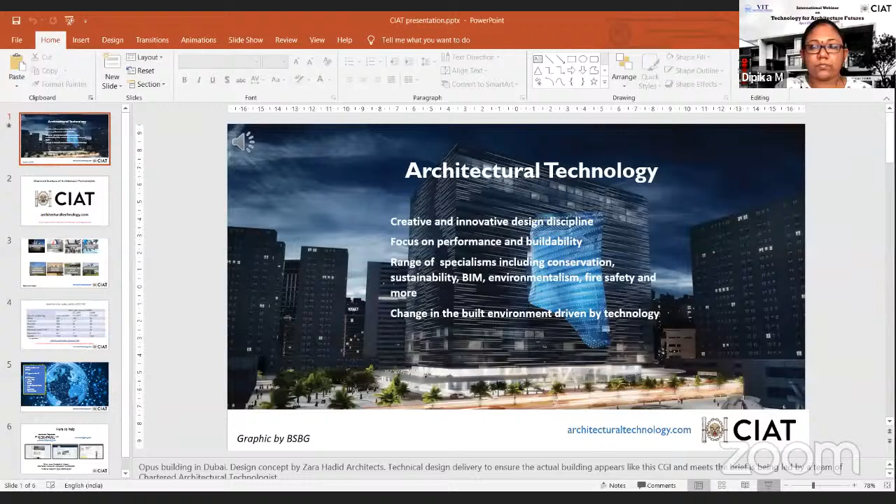Which integrates architecture, science, technology, and engineering, and focuses on performance and buildability in design. Architectural technology encompasses a range of different specialisms, including conservation, sustainability, BIM, environmentalism, fire safety, and many more. Technology is leading the change in the built environment sector, and the Chartered Architectural Technologist is the professional with the skills necessary to drive this change.

The Chartered Institute of Architectural Technologists, or CIAT, is the qualifying body for the professional qualification and protected title of Chartered Architectural Technologist. It is a not-for-profit organisation which sets and maintains the standards of education, practice, and professionalism in architectural technology by awarding professional qualifications, applying its code of conduct, ensuring members undertake continuing professional development, and accrediting qualifications in higher education.

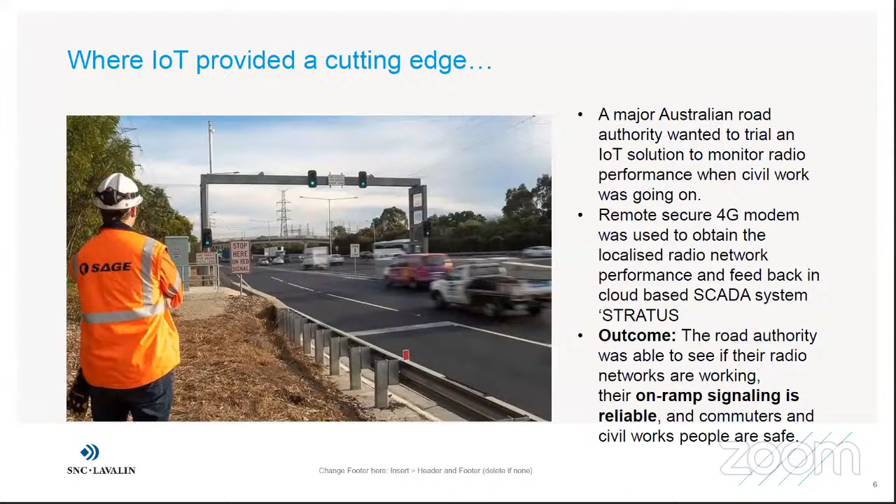to happen in a proactive manner, whereby by using the data analytics they would be able to not just look at what's going on in real time, but from the patterns that emerge through machine learning, by using algorithms, they were also looking at predictive analytics to potentially look at threats of asset failures that could happen in future. Now, this started off in October 2020, and it will be some time before they are able to capture enough data that will inform their decisions.

However, the early pilots suggest that they will be able to save a very significant amount of money through this process in terms of reducing the asset failures and breakdowns. And they're estimating anywhere in the range of 30 to 34 billion over a 5 to 6 year time frame across all of their assets. So this is very significant.

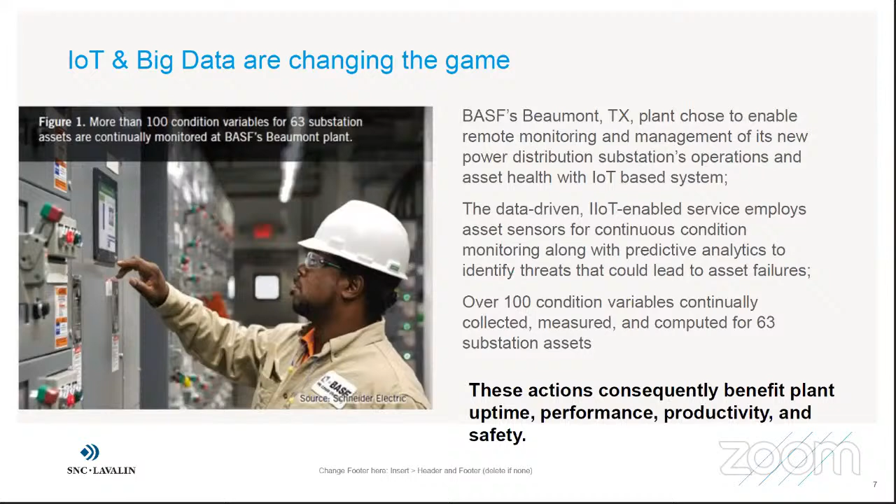And so these are not just concepts which we are talking about in a wishful thinking way, but these are very real, and these are very much being used by some companies that are early adopters of new technologies. So essentially this helps to improve plant uptime and address the issue of productivity in the sector, which is really what we're talking about. And last but not least, also ensure the safety of everyone involved. So if you can move to the next slide.

I would like to also talk about one area where Atkins is playing a key role. So as a leader in the engineering and construction industry, Atkins is really at the forefront of standardizing design components. So we are looking at finding ways in which we will increase reuse. We will reduce repeat work or rework. We will try to standardize the design components, be it in terms of the components catering to a highway construction or railway tracks.

So on a range of such assets, what we're doing is looking at the design components and trying to understand what elements need to be put in place in terms of adhering to the standards, making sure that they comply with ISO 19650, ensuring that the components have the right geometric information, the right level of information required from a manufacturer's perspective. All the metadata is embedded such that these components can be reused, and these are continuously maintained by a team of people.

So we don't need to redo the entire design the next time we design a similar highway or a similar railway track, but at least 30 to 40%, if not more, of the design work can be simply plug and play, because you're going to reuse the existing components and then you can add the bespoke elements. So standardization and reusability are again going to be quite significant going forward, as I see it, because these will play a huge role in certain sectors, particularly modular housing, for example, or schools, where repeatable designs are going to be the order of the day.

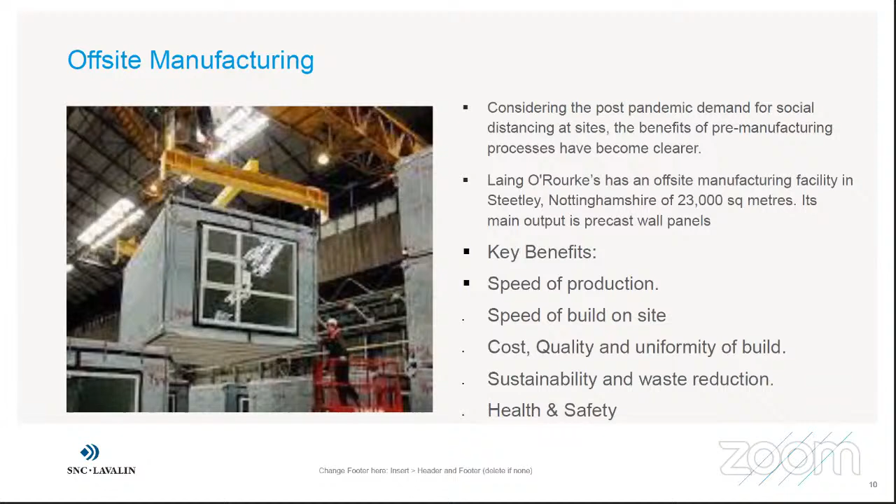And clearly, again, there is a thread running through. So I talked about repeatable design, standard design components. I talked about offsite manufacturing, and now 3D printing. If you see all of these, the running thread is really about technology and data. And so with 3D printing as well, innovation is happening where they're using this method to extrude layers of polyurethane foam and then bring in the third layer of concrete as insulation. And they are really developing these houses.

In India as well, I was quite pleasantly surprised to see a couple of days back that there's an innovation that has come up here through IIT Madras, where 3D printed housing is now becoming a reality. So it is not theory anymore. It's not futuristic in terms of concepts, but it's really happening now, and it's proven in some of the early examples that it reduces your cost by at least 20%, if not more, compared to traditional techniques.

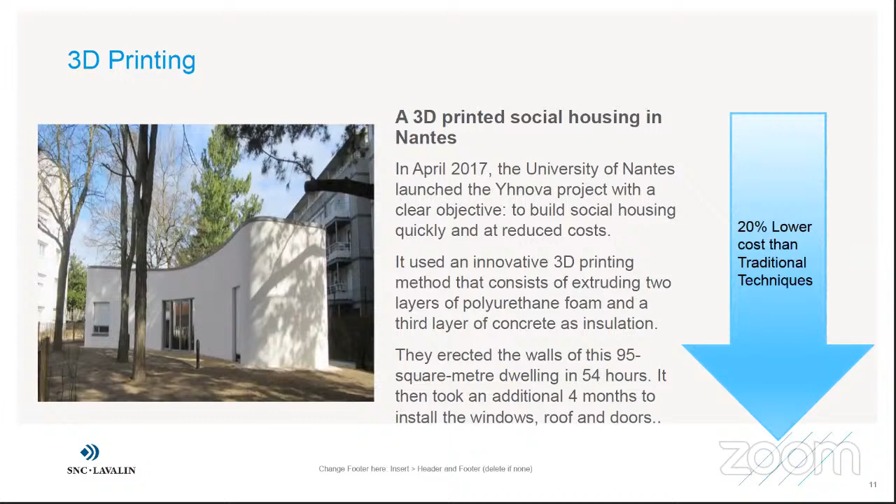So these are some of the technologies which we have seen in various areas, and SNC-Lavalin Atkins is very much intimately involved in some of these propositions. So that brings me perhaps to the last slide.

So in conclusion, I would say that the future focus with all the technology trends that we're talking about in the architectural space will be pivoted on sustainability. And as I mentioned earlier, reduction in the cycle time. We are increasingly going to see a focus shift towards safety and well-being of people as well. And as I mentioned, human-centered design is a key ask we are noticing, particularly from UK and US, with a large emphasis on citizen and user experience.

Of course, Europe has been one of the earliest in this space, where we did some work for the government of Norway to develop sort of a mini digital twin where human-centered design was involved. So there is a lot of disruption that is happening in this space, and it is quite real. Digitalization will certainly lead to some level of disintermediation and drive changes in asset building and O&M, because what I start to see is that digital marketplace and platforms will have a larger role to play.

I mean, even today we know that, for example, NBS is playing a phenomenal role within the building space, particularly in the UK, where they're standardizing templates, they're curating contents, and actually designers can lift and shift and pick and choose some of these content and straight away plug and play in their design. So increasingly we will start to see a lot of disintermediation in this space.

Plus, digital marketplace could bring multiple forces together by way of connecting the consultants with perhaps contractors in the not too distant future. And procurement models are bound to change with Project 13 kicking off. I think that we will start to see collaboration being the order of the day. We will see that the labor-intensive nature of the construction sector could see a paradigm shift with some of the play of technology. Again, all of these are very real, and we got to be prepared for that change when it comes in the next few years.

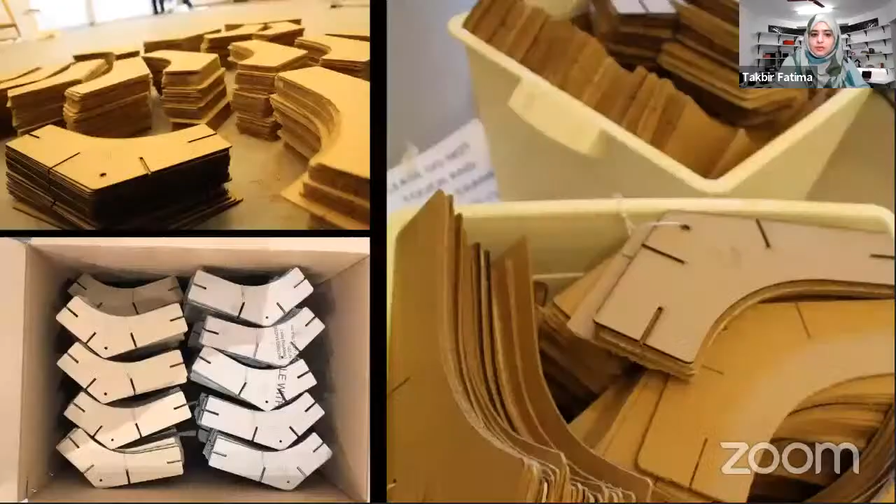And then we sort of tried to predict one of the options that could come up out of it. There are multiple ways of putting it together. So computationally, we were able to predict that. And then we digitally fabricated the pieces in cardboard, and we just gave it to the public and told them to grab some pieces and start building.

So this kind of promotes the idea of collaborative design, where people from all different ages and backgrounds come together. It's a very self-explanatory process, very inclusive and collaborative process, and there's no right or wrong way of doing it. So over a period of 10 days, they were able to build an installation incrementally. Different people came and added a few parts of it, and over a period of 10 days, this became a sort of shared authorship and shared ownership public art installation.

So every few years, we try to revisit some of our previous designs, and we try to see what we could have done further to take it to the next level. So this is a system that we started to work on. Previously with the interlocking system, it was kind of random. So we decided that it needs to be based on a set of rules, and then let's see what happens.

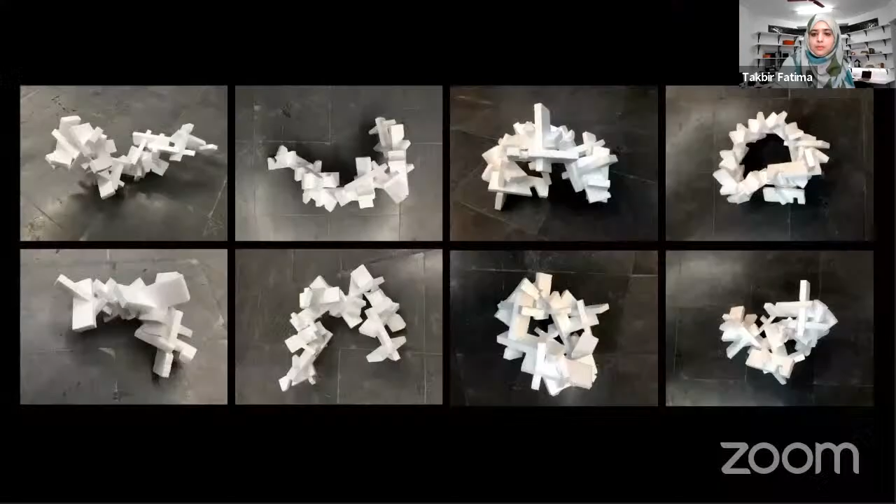So just by changing the rules and the parameters, we're able to get a whole range of different outcomes using the same, this is just one unit, which is being repeated. So it's a repetitive system, which has discrete units, which are coming together in a sort of dry construction system. And then you get a whole catalog of different units. So it's a prototypical system that we are coming up with.

So similarly, last month, before the situation with the pandemic was as bad as it is today, we went to Kerala, and we did this workshop at Kerala State Institute of Design for students from different design backgrounds. And you can see that they came up with their own basic unit, which is laser cut, and it has all of these grooves in it, and then you can assemble it, disassemble and then reassemble it to get a whole range of different outcomes.

So it's a prototypical system with discrete units, and you can come up with different kinds of morphologies just by changing the parameters, and you get different outputs. And then they also translated that into computation and projected it to get higher resolutions and larger aggregations. And the last part of the workshop was to have a larger scale aggregation, larger scale units. So it becomes almost like urban furniture of sorts.

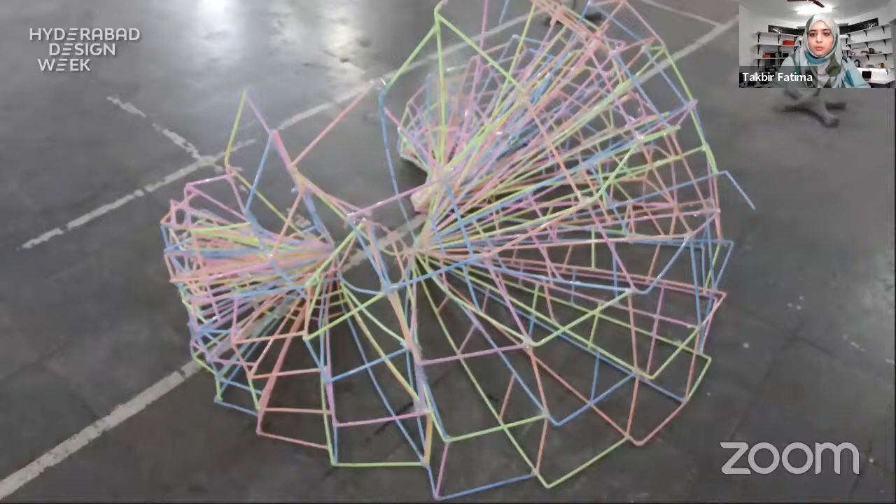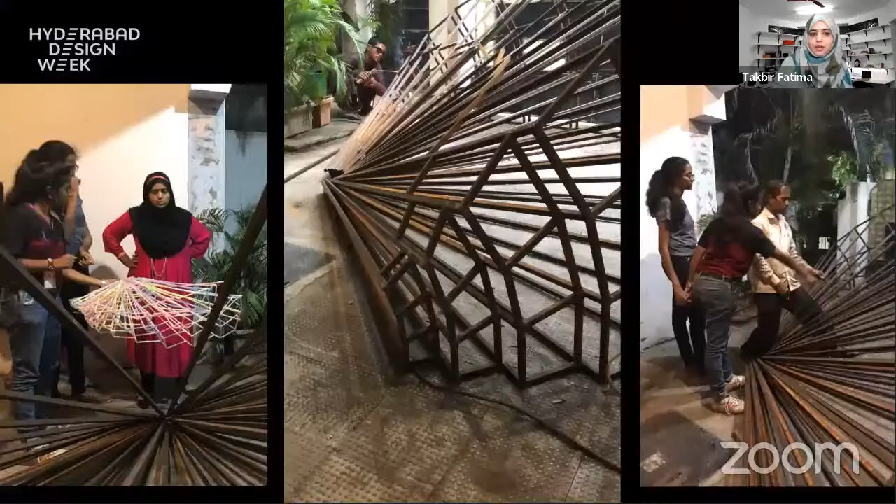So this is one, and this is another example. And we are also exploring remote build processes with our next workshops. This is another workshop that we had done for Hyderabad Design Week, where the students did algorithmic designs, and then we selected one of them and translated it into full scale, large scale and real material. So this is on permanent display opposite the Telangana State Assembly in Hyderabad.

At the same time, we were exploring this concept called the digital vernacular, where we have this dichotomy of computational design as well as local material and craftsmanship. So we designed a series of installations computationally, and then this was the local material cane. So we used local craftspersons and furniture makers to realize these.

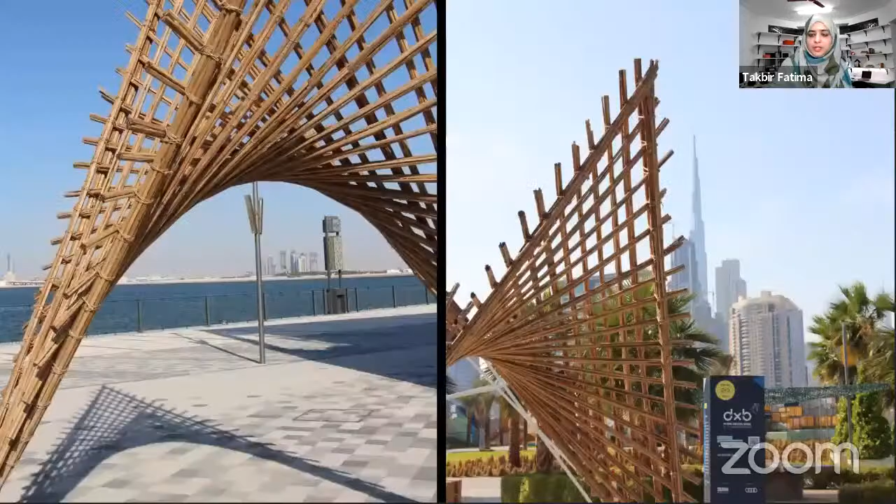Previously, for Dubai Design Week, we had done the same hyperbolic paraboloid structure in Arish, which is the local material there, the date palm frond. This is located in Dubai Design District.

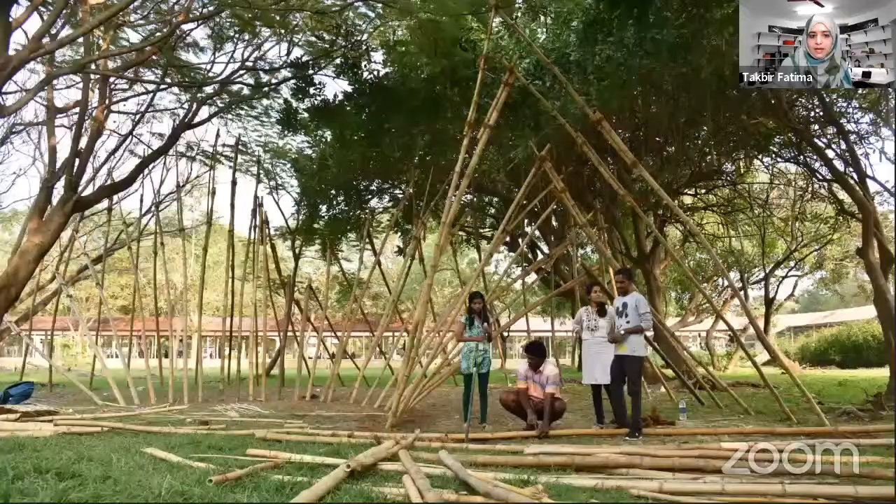And even prior to that, this concept actually was born at VIT Vellore, where we used bamboo as local material, and we used the help of bamboo craftsmen to learn from them. And then the students came up with a whole series of about 8 different parametric pavilions.

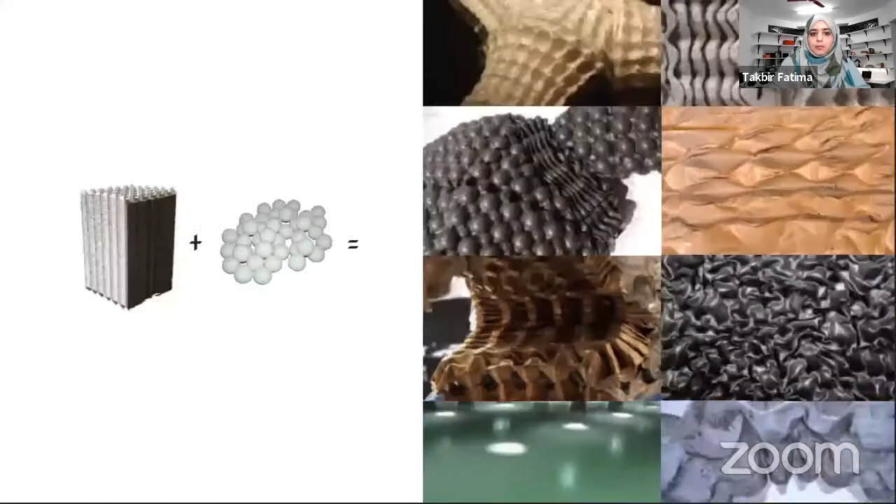So we call this process programming matter, and this phrase was coined during my time at the DRL, when we did this research during my thesis, where we used egg crates as a building material. So we proposed egg crates as a new technology in building, and instead of eggs, those aren't eggs, but ping pong balls. So when we add rigid elements to the cavities within the egg crate, it has a very peculiar geometry to it, and it tends to take different morphologies based on the programming of the matter that we're doing.

So the way that we manipulate or code the way the units are placed together would give us different kinds of results. So they almost become like control points. And the way that we bring the system together, it's a low-tech, high-tech system, which we call a deflatable architecture, because we are actually using vacuum and deflating the system.

And once you remove air from the system, these independent discrete units come together and they become monolithic, and also they're really rigid, and they take on different geometric forms and curvatures based on the coding that is embedded in them. And once you release the air again, you'll have a recyclable kind of system because you can redo it.

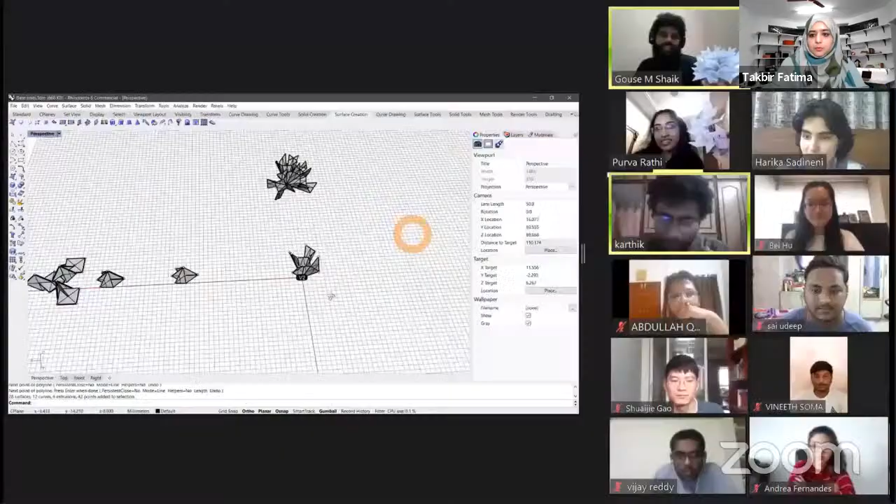So we decided paper was the most versatile material that could be used for online workshops, the Fractals workshop. And you can see the analog models being translated to digital models, and then again to virtual reality. So here, this is a culmination of the student work from a workshop we did with the Boston Architectural College. That is Peter Atwood, the director of digital media, who co-directed the workshop with me.

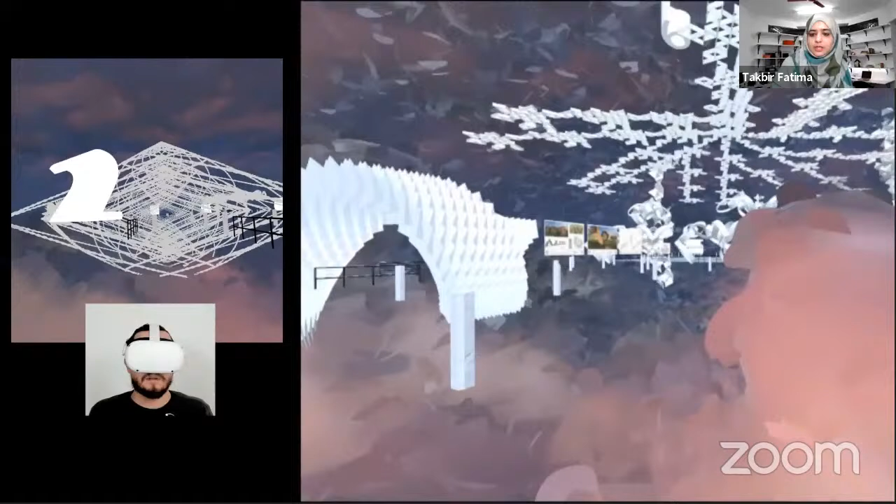So what's really great in virtual reality is that it's completely free of real world constraints, like physics and gravity and scale. You can pass through the models, you can fly, and you can see things from different angles and different vantage points. And so this becomes almost like a sort of virtual urbanism.

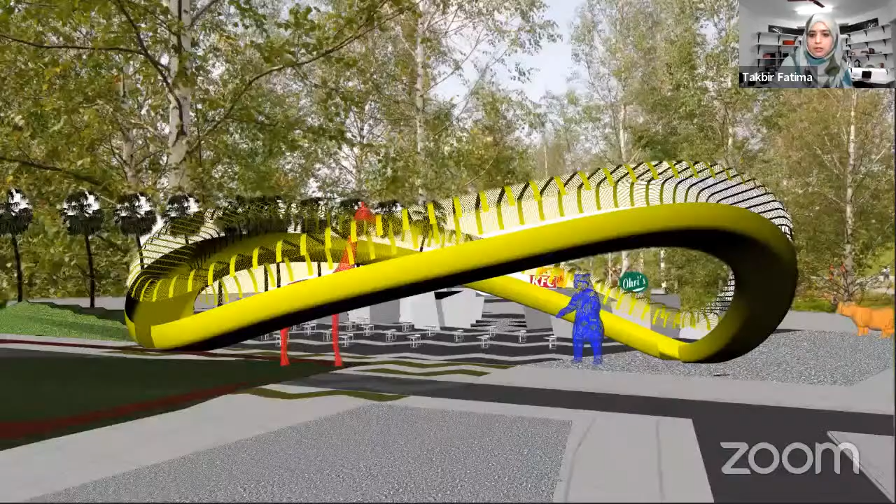So coming to our practice, we have a whole range of different projects from different disciplines to different scales, from digitally fabricated wearable tech to a smart, accessible park for the city of Warangal in Telangana. So Le Corbusier said that a house is a machine for living in, but now I think that's become antiquated, and I think a building is an extension of the body.

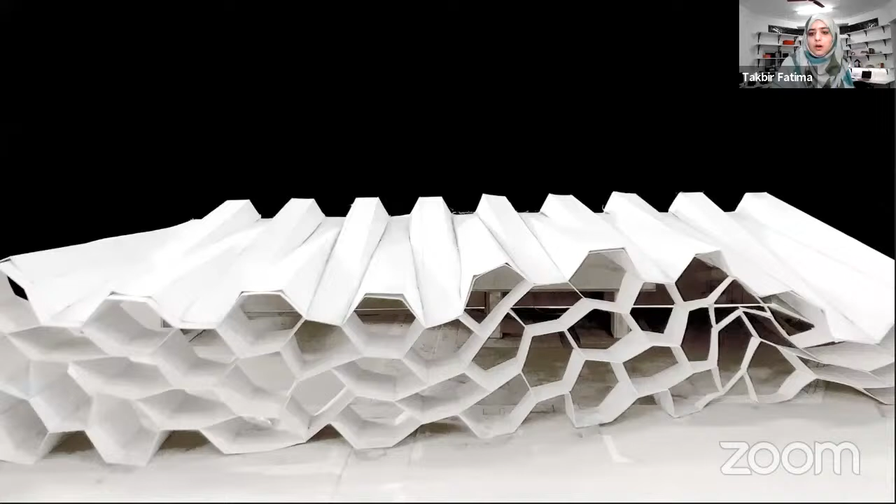So this is a project where we were asked to design a smart office for an IT and IoT company, embedding their IoT products into the building itself. So this is an existing commercial building, on top of which we had to design a penthouse, and then the beehive kind of structure is the facade, and the undulating roof become an envelope for the building.

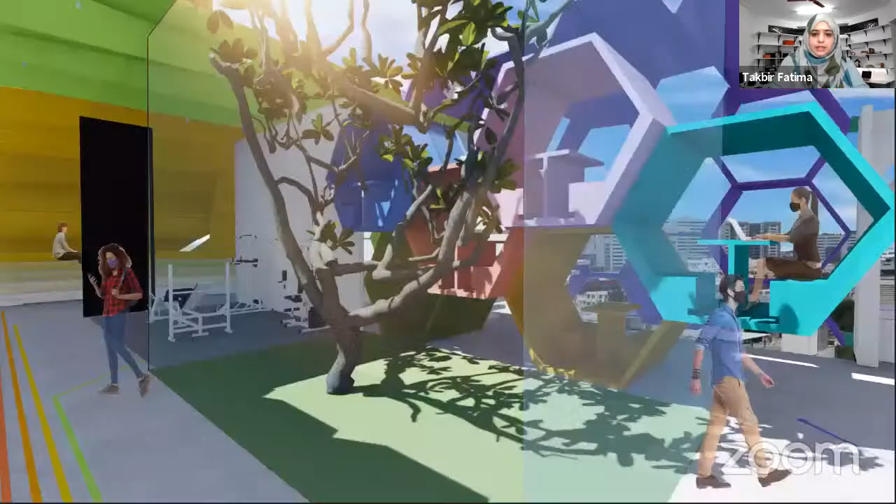This is the evolution of the undulating roof structure, which is almost like an extrusion of the beehive surface. And we used some tools for analyzing the daylighting and the heat gain. In a lot of designs, we like to incorporate traditional Indian architectural elements within contemporary spaces as well.

So we have the courtyard, which even though it's on the 6th floor, gives you this ground floor feel and makes it a green space. And then we have the jali, which is the screen, the hexagonal beehive structure. And the screen is parametric in that it varies in depth in different places.

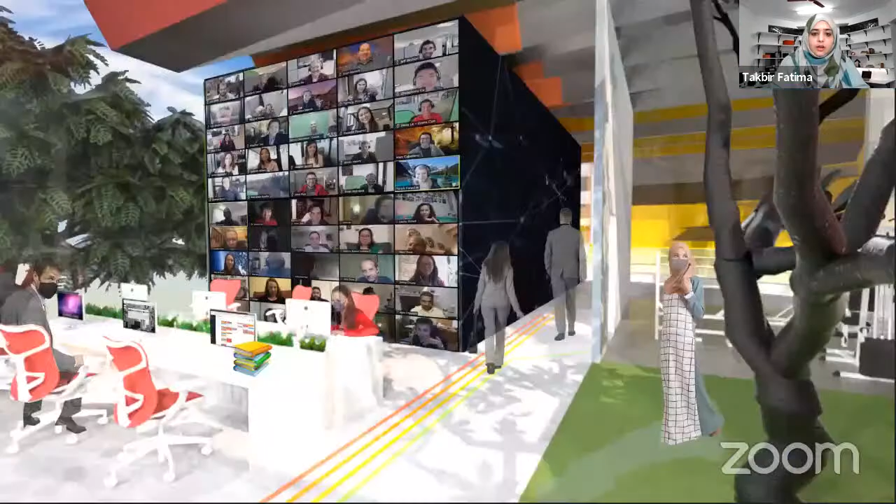So here you have some parts which are deeper, and they become these isolation pods where people can sit separately and work, and then there are spaces where people can work together as well. This cube that you see is a water tank that was existing on site, which couldn't be removed.

So we converted that into a 3D sort of wall, a smart wall, which could have company-wide meetings, but also the IoT products that were embedded were able to gather data from the environment around this building and then project that, not just project it onto the screen, but also the building becomes like an organism that responds to the environment and the data that is being fed to it.

So in terms of the lighting, as well as the temperature, and then the tinting of the windows, all of these things become responsive. And that's how the building situates itself on top of the existing building. And what's really great is that you can see the inside of it, which is really rare to see the inside of the top floor of any building, but the metro passes right next to it. So you would be able to see the inside of it. The construction has not started yet.

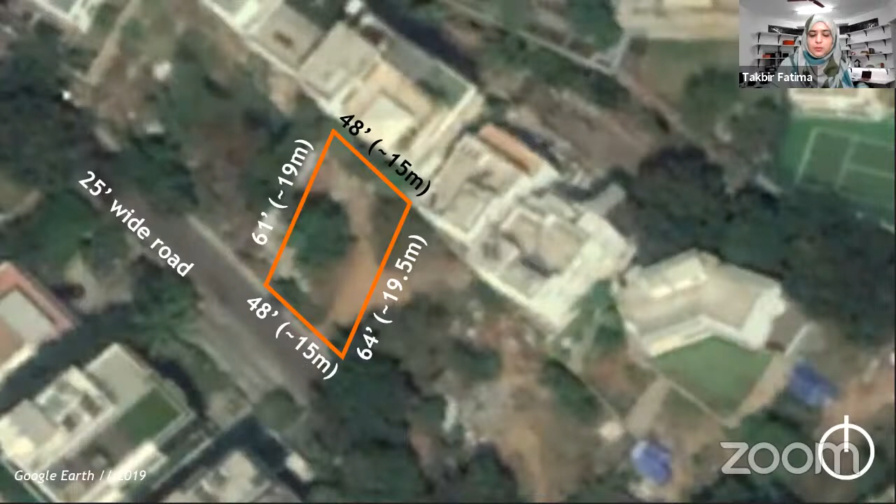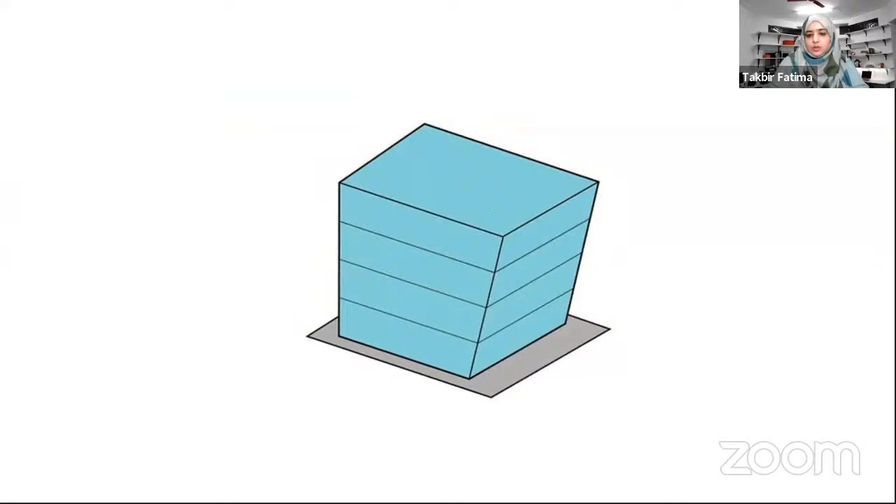And finally, this project is a residence in a very oddly shaped plot in Jubilee Hills in Hyderabad. So you can see that the constraint that we faced here is that we had really heavy programmatic and spatial requirements from the client, but the space was not sufficient, and we weren't able to do orthogonal spaces. And so these are some of the design explorations we did for spatial distribution. And this is how the building evolved, in which we stretched the building from the top and then started to slice it to create an orthogonal stepped kind of structure.

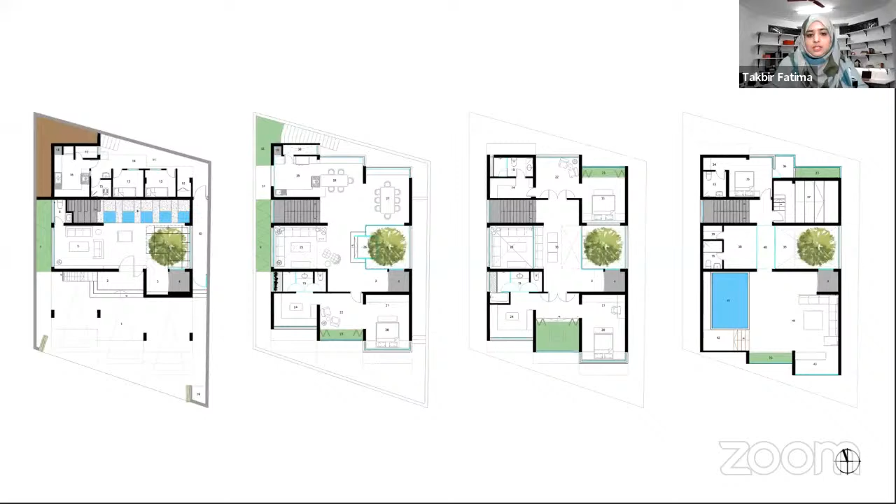So you can see that every level is like a series of boxes which are stacked one on top of the other, and there's an overhang of 3 feet at every level. And you can see that the ground floor has the smallest floor plate, and then it grows as it goes up. And what's great is that it sits within the bylaws and the regulations, because on the ground floor, you're supposed to have setbacks, and then on the upper levels, you can have a cantilever of about 10 feet. So we're able to get a total of 9 feet.

So where technology comes in is that the facade design is a computationally designed louver system of rotatable interconnected louvers, which are parametric in the sense that you can rotate them at different angles to create different percentages of openings, and these openings depend on the program on the inside. So it's an openable and closable kind of system. So it's a dynamic facade which can be connected to the home automation system and also be controlled by a smart device. So depending on the amount of light and privacy that's required, you would be able to manipulate and control the facade.

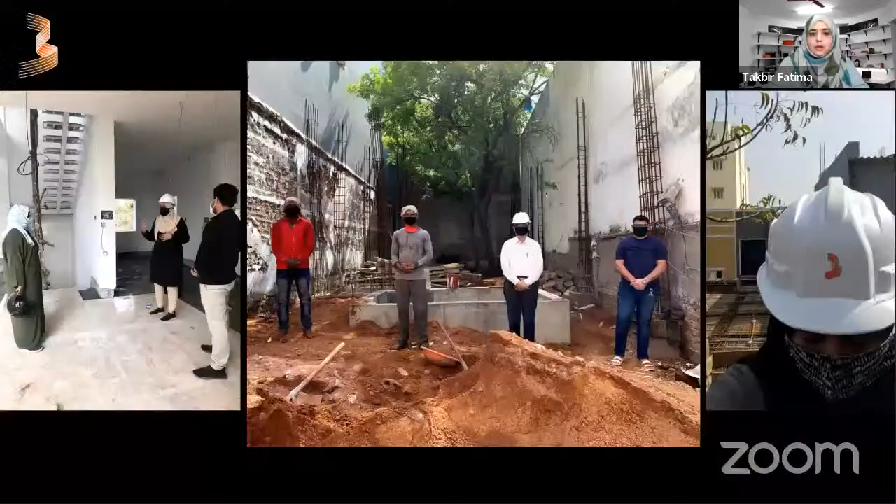So as I said earlier, it all begins from education. So in parallel, we started this initiative called Studio to Site, where we take students and young professionals to our live sites. It's a long-term program where we take them to our sites every couple of weeks, and they are able to learn hands-on from the site itself, and they're able to learn through the construction process as well as learn about project management. So some of these classes were taken online.

We don't just work locally, but by the use of technology, we're able to work internationally as well. So during our lockdown, London didn't have a lockdown at that time. So we were able to design a restaurant in London while we were sitting in Hyderabad. So you can see our remote site visits that are happening on the left side. We have done a lot of remote site visits over the years.

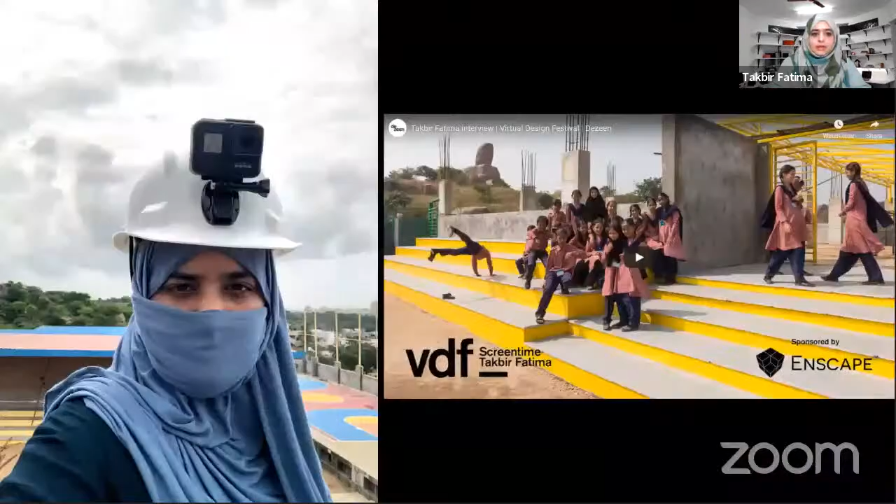The school has kind of over the years become quite popular, and it was visited by groups of students from all over India almost every month. And then because of the lockdown, we couldn't have any visitors. So instead, I did a virtual walkthrough or a remote walkthrough of the school for the Virtual Design Festival, which you'll be able to see on YouTube if you just look it up.

And also, I think it's really interesting to note that the school was included in the Rethink Design Guide as a case study for architecture for a post-pandemic world, published by RIBA Publishing. And finally, we are honored to have been longlisted for the Dezeen Awards as an emerging architecture studio of the year 2020. We didn't win it, but I think being longlisted is quite an achievement for us. Thank you.

Thank you for that presentation. It was pretty fascinating to see how forms come to be by altering algorithms in a certain way and how they get translated into digital platforms and all of the building science elements coming into these forms. It was a wonderful presentation.

Next, we have architect Joe Healey. Joe is a chartered member of CIAT and a senior architectural technologist with 16 years post-graduation experience in the UK, Middle East, and Australia. Joe has worked on a number of exciting and important projects over the years, with a particular interest in historical preservation and sports stadium design. Currently working in the architectural specifications field with a commitment to staff mentoring, which is documented in a book that is about to be released. I invite architect Joe to begin his presentation.

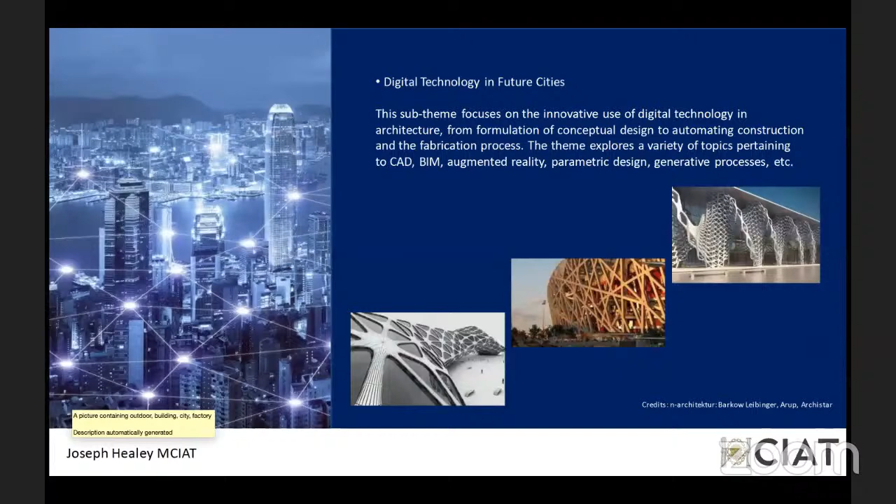So like I said, away slightly from the actual pure design of buildings, it's the sort of involvement of technology in our day-to-day lives and then integrated into our buildings that I've been starting to wonder, particularly over the last few years, how much do we need these interventions? As I'm about to describe, they can sometimes be positive and negative.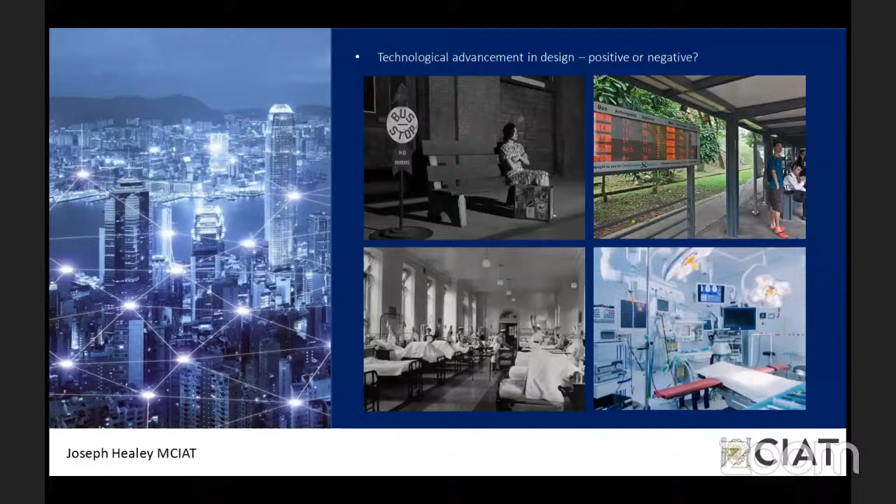But to me, that brings into question, and it's interesting to put this to everyone on the call today, well, on the right-hand side picture there for the hospital, you've got a number of computer screens and all sorts of analysis going on, but would you prefer to have a computer looking after you whilst you're ill, or a person? And that's where I think the technology is really taking over to a point where we need to balance. And coming back to my original point about what is the need for the technology that we're now inviting into our cities and designing.

Now, to some extent, if you have more of an immersive view of that cycling route on a screen, to what point do you say, well, I don't need to go to the Alps in Europe or amazing mountainous regions to cycle anymore. I could actually cycle in my own house, have a big screen in front of me and get at least part of that experience whilst looking through a screen.

So quite hypothetical. And I think you'd ask different people, they would have different opinions about the whole thing. But I think there's going to be a large proportion of people that would say, well, I can get an experience that is never going to be the same as the original, but it's not far off in some ways. So it's a massive effect, I think, on not only travel, but the experiences that we have in order to actually go to places and see them for real.

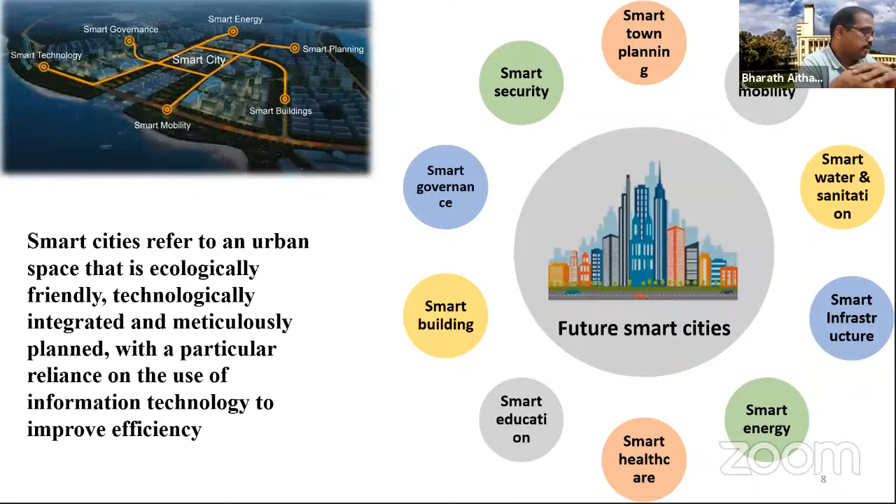So now, whatever most of the countries are trying to do is either look at the ecological part and integrate technology, or integrate technology in terms of planning. So if all of these are pushed in together, then probably we will have much better future cities that can be more livable.

So having looked at this, there was an Open Geospatial Consortium in 2015 which brought out what should be a component of a smart city, or let's say a future city. So as I described, you have the first layer, which is a sensing layer. You can look at different city sensors, the data that is crowdsourced, data that can be sensed out. It can be from your drones, it can be single layer data sets that come in. It can be your satellite data sets.

So these actually become part of the data that comes into the data layer, and then builds up into a business layer where you have a lot of catalogs, semantics, and visualizations. I'll show you some of these visualizations which we have already done. And this can be applied into various applications, whether it is health, public safety, environmental protection, urban planning, sanitation. So all of these can be done with this data. So that's how the IoTs are connected in terms of building more data from its own intelligence that comes as a backbone, where the computationally intensive intelligence can be built upon.

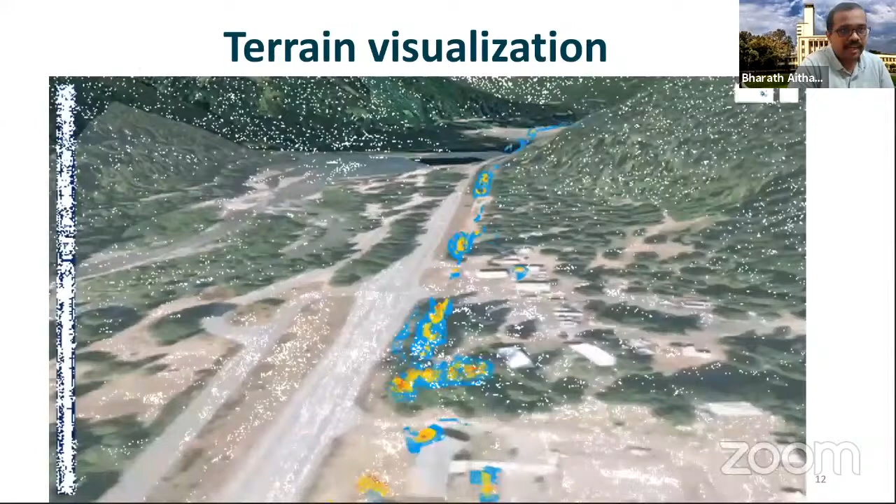So having looked at this, what I pitch is that geospatial technologies are for future cities. Let me give you some examples. So if you can see here in a particular video, this is showing you a terrain visualization and a heat map. So when I look at a heat map, it is easier to understand. It doesn't even take a few minutes for me to develop this heat map, because the technology has already been developed to such an extent so as to understand what is the stress level in that particular region, particular building, and how the stress level can be addressed easily.

So another very important concept, I think the youngsters are very interested in this, is geofencing. I hope you have seen some of those cars that have geofencing. So it is how you actually protect your data, or, let's say if it's the car, protect your car from various things, that it can be stolen. So how it can be kept in a particular place without going too much of a distance. So we use the GPS signals to track it at a particular radius. Post that, it will be completely under data surveillance to the owner or, if it is connected, to the police department.

Then think that geospatial technology is actually creating virtual cities through virtual reality, wherein we are looking at how virtual reality can bring in more planning, more contextual information that is necessary for it to be utilized in the future.

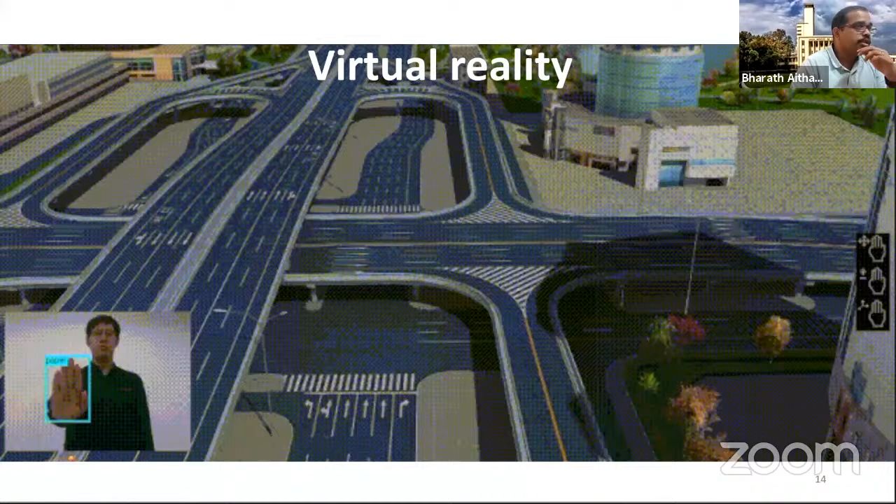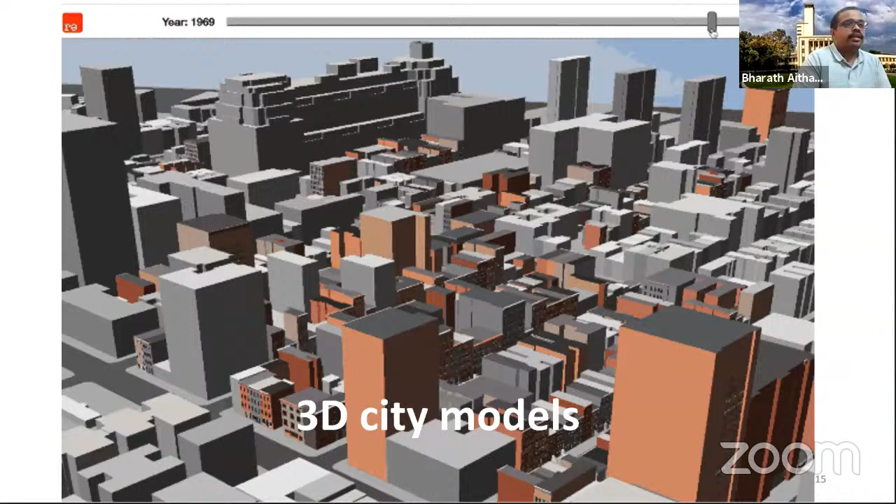So similarly, if you look at some of these 3D city models that have been developed over a period of time, and some of the spatial data that has been developed, you can easily understand the pattern of growth. You can look at how different peak models are here, what are the changes that are happening and what is the effect on the environment. So then going back, you can relate it back to how different entities are related to different things around you.

So there's one very good example. One of the speakers spoke about digital road networks. Yes, it is becoming a reality today. If you look at even your Uber, Olas, etc., they have complete control of the digital road network. And the best example is your Google Maps.

So you know the real traffic conditions. How do you get it? It is basically crowdsourced data, which is pinged into understanding crowd behavior and vehicle behavior over a period of time. So that's how you get that. And in today's scenario, we see that the error is somewhere around plus or minus 30 seconds.

So which is quite good in terms of the necessary options that are available. So then we have this one developed by United Kingdom Road Safety, where they are developing an IoT platform looking at how road safety aspects can be integrated in planning, and looking at the behavior of the people around on the road.

And let me show you a complete video. So this is how geospatial technologies are helping smart city growth. Whether it is traffic, connected lights, connected behaviors, as the previous speaker Joe spoke about the cameras, yes, they are connected. You can always connect those data, put it in the public mode wherever it is required, but also the privacy of these data can be improved in case the government wants to do it. So these are some of those.

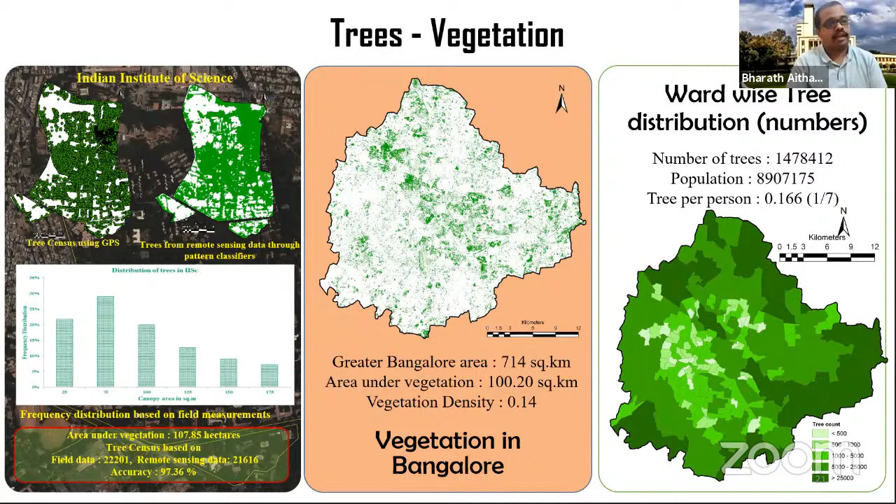So this is how geospatial technology can be used to get more information or data. On your left-hand side, you can see the tree census that we did on the Indian Institute of Science campus in Bangalore, which has about 22,000 trees. When we looked at the remote sensing data using certain machine learning techniques, we could map out each and every single tree, almost closer to 97% accuracy. Then we started relating each aspect of how this has changed.

If you look at greenhouse gas emissions, whenever people speak about them, the first thing they say is road transport or industry is the major part. But interestingly, when we calculated this, the domestic sector here was a huge contributor in terms of greenhouse gas emissions. So why is that?

If you look at planning in Bangalore, many of the houses or buildings that have been built are a copy-paste from the temperate climate, whereas India has more of a tropical climate, and it has to be in a different mode. So that was one of the major reasons why this was coming up as a major contributor in terms of greenhouse gas emissions.

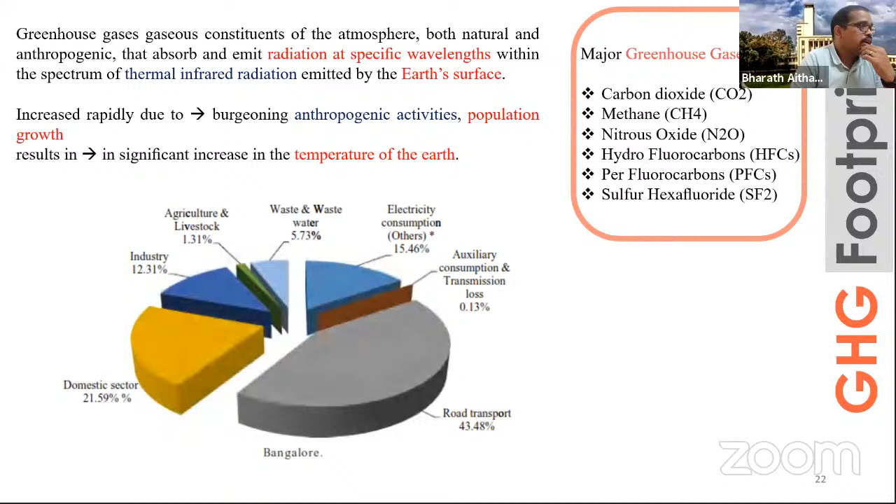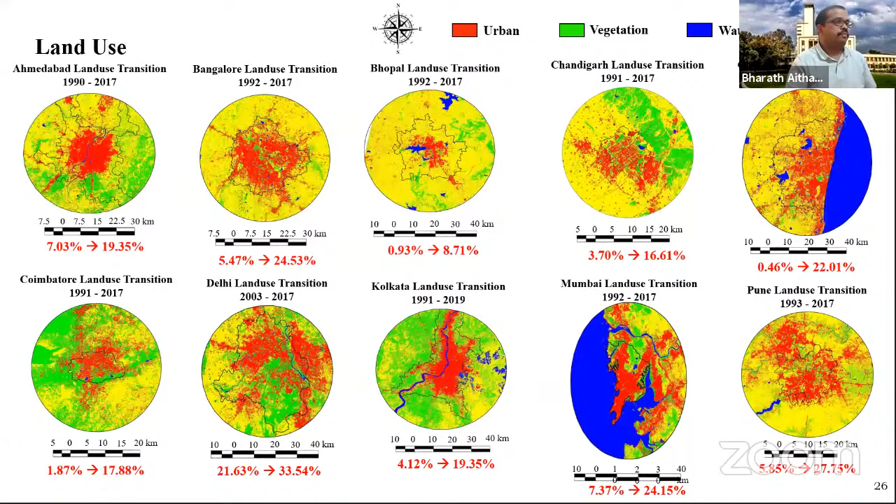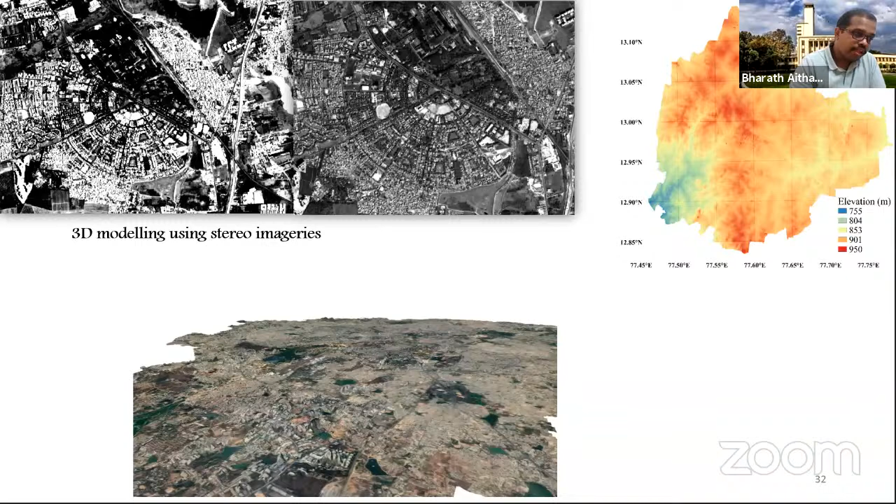So along with that, when we are showing this, we are looking at linear patterns, but what people like to look at is the 3D part. Satellite data, especially stereo data, gives you more 3D information. So that is what we are trying to look at. One of my research scholars designed his own method using a deep learning technique and was able to understand the height of a building, the size of a building, and where the rooftop is.

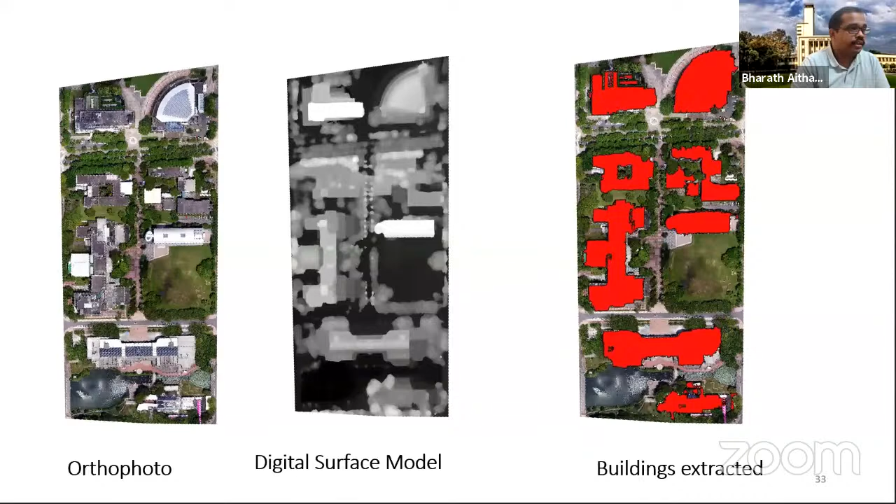So it can be easily extracted without much trouble in terms of integrating. So we are trying to automate this kind of a model over the large area. So we are trying to collect more information about each and every city. So yeah, this is what the model prediction says. It was quite accurate, because we had an accuracy of about 95% to the ground data.

So having said this, just the last few slides, on what IIT is doing in terms of this. The first thing that we did, when we were looking at all of this data, we designed a kind of report on how we develop a roadmap for developing an urban observatory, which means it is a connected IoT system which is collecting data and analyzing data on a real scale, and how it can be actually put to use.

So similarly, we had even the legal and policy perspectives, which Joe was actually speaking about. We detailed out what the legal issues are, what policy interventions we have to have, and the kinds of privacy issues that may come up when we are developing such an observatory. We did this with the British Deputy High Commission located in Kolkata.

So we are also putting all this data onto a particular website, and this website would be accessible to anyone who wants to look at this data, analyze the data, and also someone who doesn't have the computational power to analyze such data can do it just with the single data that is on this website.

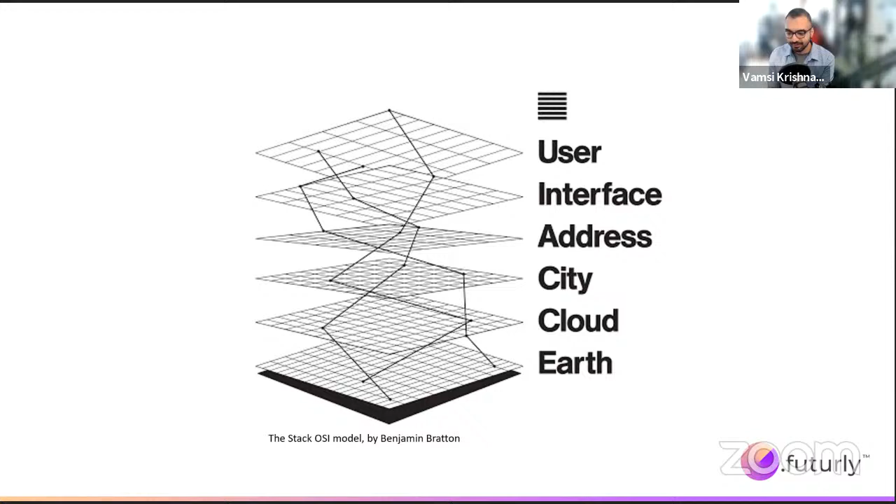On a lighter note, while we are talking about these new fields, and these fields are getting overlaid and superimposed into our physical environments through the medium of virtual, augmented, and mixed reality, I think even today and the past 2 days during the conference, I'm sure you've heard so much of these terms. So I will keep it super short and give you a brief distinction between these three terms.

The first one, virtual reality, is a completely disconnected space from the real world, something similar to movies such as Ready Player One or some other popular media. I'm sure science fiction has a lot to offer in terms of virtual reality. And then we have the augmented reality paradigm, which is an overlay on the real world, accessible through your mobile phones, through apps such as Google Lens and Pokemon Go, the most popular game in recent

years. And mixed reality, on the other hand, is a slightly more advanced version of AR, augmented reality, where we are able to interact with both the physical and the digital elements at the same time. So think of it as an augmented reality layer, but a lot more responsive to the environment. So what I'm going to show you is an amalgamation of these fields, these technologies, and the new spatial conditions that are formed through these.

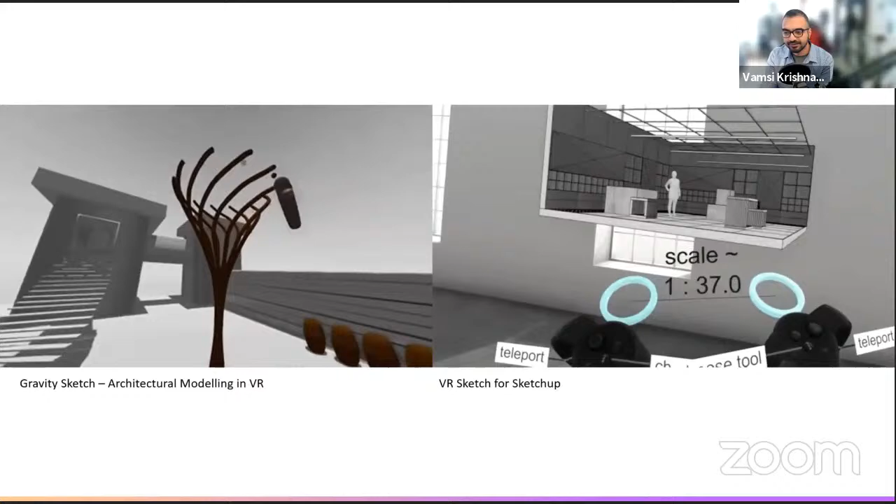So to begin with, this field operates at different scales. I will briefly walk you through the scale at which most architects and designers operate at this point, which is, they use this space to harness tools of design, communication, and even as an aid for fabrication or construction. Some of these available tools let you sculpt, design products, interiors, and even create architectural spaces.

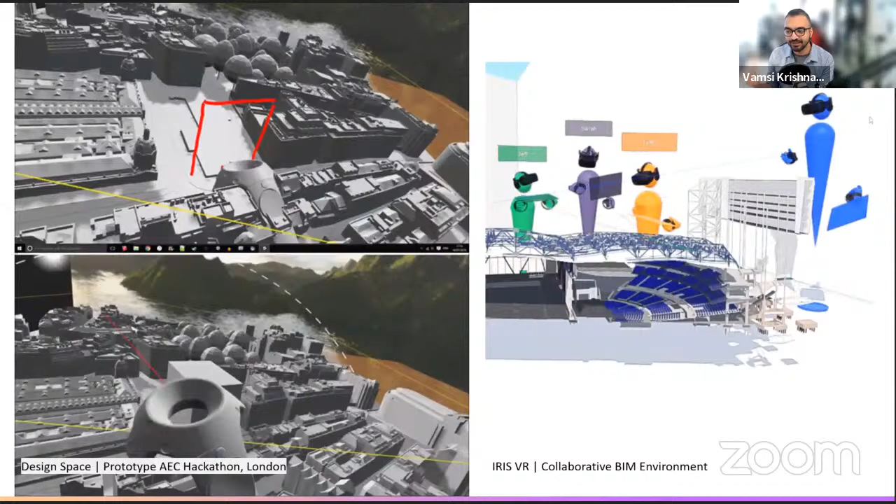This disrupts the whole idea of how we interact with the interface, and this creates new spatial possibilities for architects, where we can perceive a sense of scale and proportion, and even be able to interact, react and respond as well. And it expands to a space of collaboration where you can collaborate, iterate, and take real-time decisions on design or on construction, and even on your BIM models.

So at the scale of a city, this is where the AR or the mixed reality part comes in. The spatial interfaces start to create a new overlay where we interact not only within the bounds of our screens, but also engage with the space all around us. So think of it like a spatial interface that's all around and spread across the city. Overall, what I'm talking about builds upon all the amazing knowledge that was given to you by the previous speakers.

So I'm showing you how it feels, what the application looks like when this sort of technology is in place. Our surrounding context and the city becomes an interface for new interactions. This begins to change how we perceive urban spaces, streets, landscapes and buildings. As a final example of how we utilize this medium as a tool or an aid for design, we can see this example of Fologram, where architects and engineers could use this as an aid for bending complex assemblies and fabricating structures in real time on site using spatial data. And there are certainly plenty more possibilities.

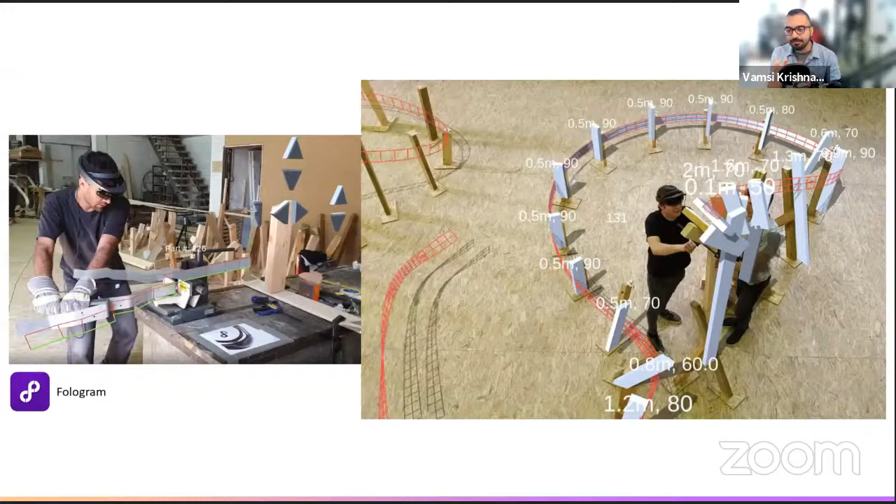So with that being said, what I'm more focused upon is the way these fields provide an architectural space, a space for operations or social and communal interactions.

We see a whole emergence of social and interactive spaces, communities, workplaces, and entertainment, all accessed through this technological hybridity. I think that's a lot more evident since the pandemic. So the intimate spaces around us transform in scale to a much larger interconnected field that simply cannot be neglected

by us right now. Because we are all prepping up our avatars and stepping into these spatial social platforms such as AltSpace, Mozilla Hubs, where we can carry our personas through distinct avatars and interact, collaborate, and even have events together. Probably the next conference by VIT would be in a virtual platform. You will never know.

So the scale of these spaces is constantly expanding and evolving into their own, in the form of a city, in the form of a country, or it's much larger than that. It's much more global at scale, because these things derive from the digital and they derive from the idea of social media. So we are talking about millions and billions of users that are coming in and flocking into the space. So having said that, now let us take a look at the expanded arena of gamescapes.

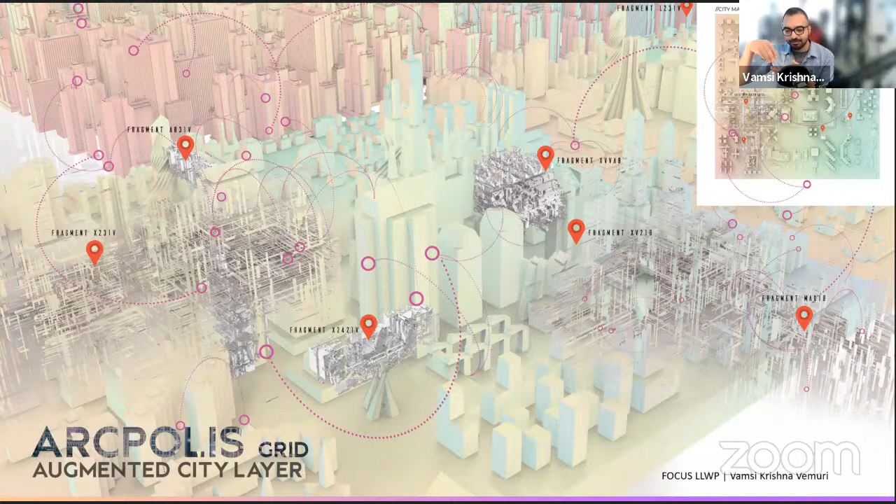today. And how do we see a person's lifestyle? How do we see a person's activity with these kind of frameworks in place? So let's assume that this sort of a framework is there. And I'm going to talk briefly about an app called Focus, which is an AR, augmented reality based educational system that is gamified based on Cedric Price's Potteries Thinkbelt project.

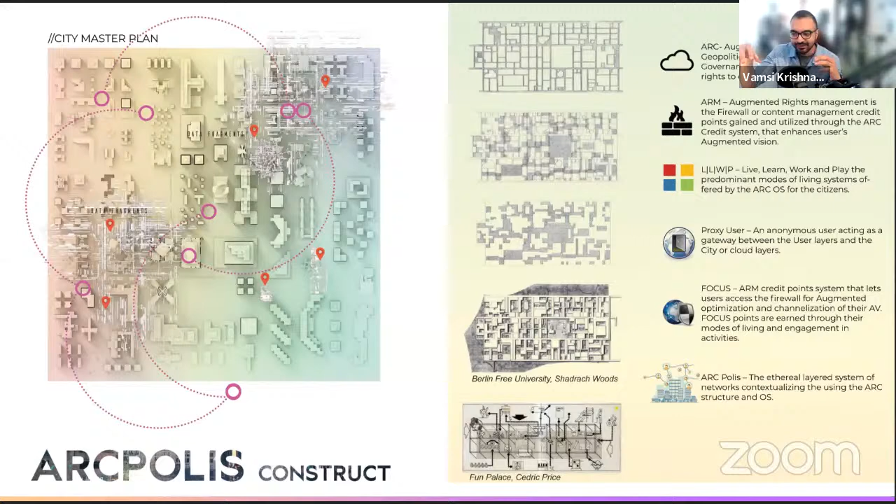And it has a lot of educational modules that are scattered around the city. And how does one person navigate and collect these modules, consuming this information while they're traveling? And when your notifications, when your messages are all spatialized, how does it look like? How does it transform? That's what I'm interested in. These are just brief snippets that I'm fast forwarding.

Right. So with that being said, last year we kickstarted Futurely. It's an initiative that was conceived during the pandemic. And as Ms. Deepika introduced, I have been an active educator, but not from the institutional point of view, more from an external point of view of conducting short courses, workshops, and events. And we thought that we have this opportunity to bring this all online and reach out to a lot more people across the world. And that's how we started Futurely last year.

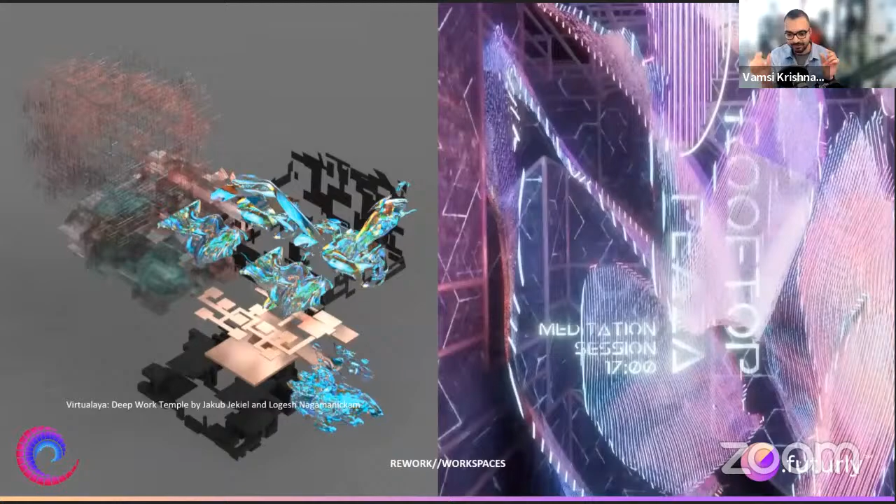So to begin with, during last year's Digital Futures event, we began to question the idea of workspaces and how they transform in the virtual. This project attempts to create serene characteristics from a temple within the virtual workspaces. I'm going to quickly run through because I believe we have a shortage of time.

And another project was a virtual adaptation of the Hyperloop transportation system, a transportation system that was conceived by Elon Musk, and how it can operate, or how we can simulate such an apparatus in the virtual space, with conveyance and transportation as a means for dynamic workspaces in VR. Some of the key questions that we explored include the materiality in VR and the modes of navigation in VR.

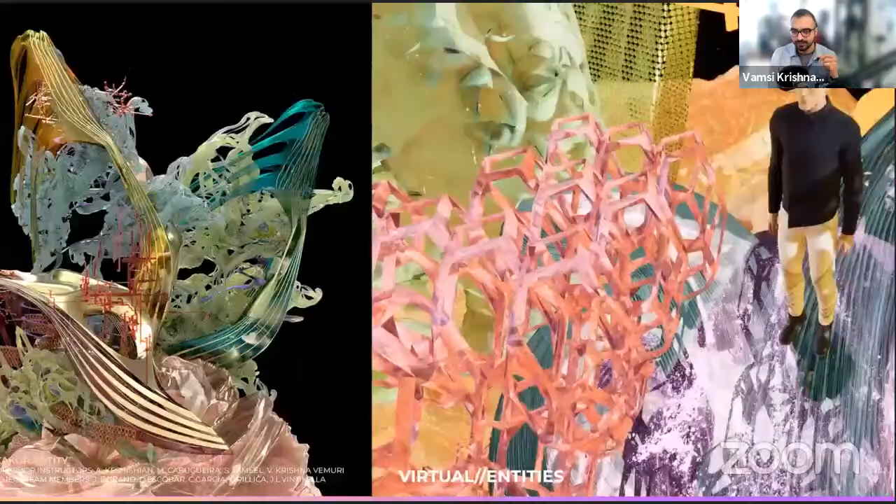And beyond the conventional architectural conditions, this is another project that attempts to create a miniature planet through an alienated landscape filled with portals and teleportation mediums of circulation. So we begin to question how various circulation systems that we know in a two-dimensional manner of plan and sections can transform into a gamified virtual space.

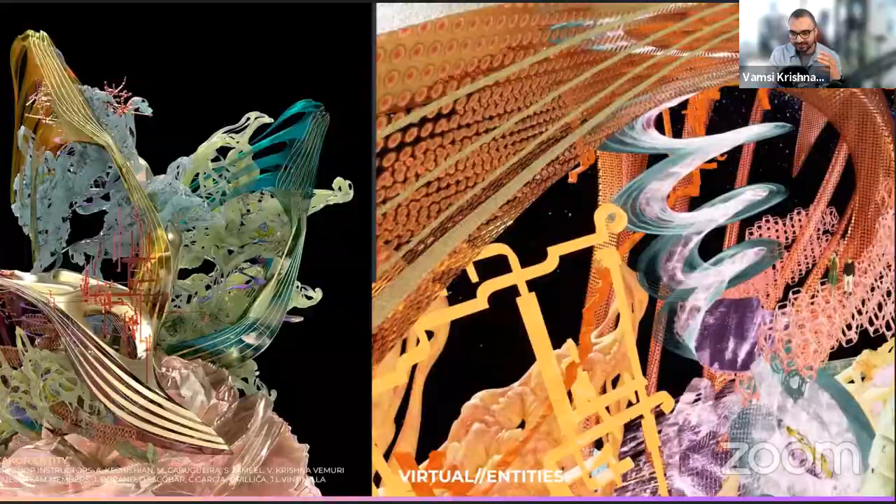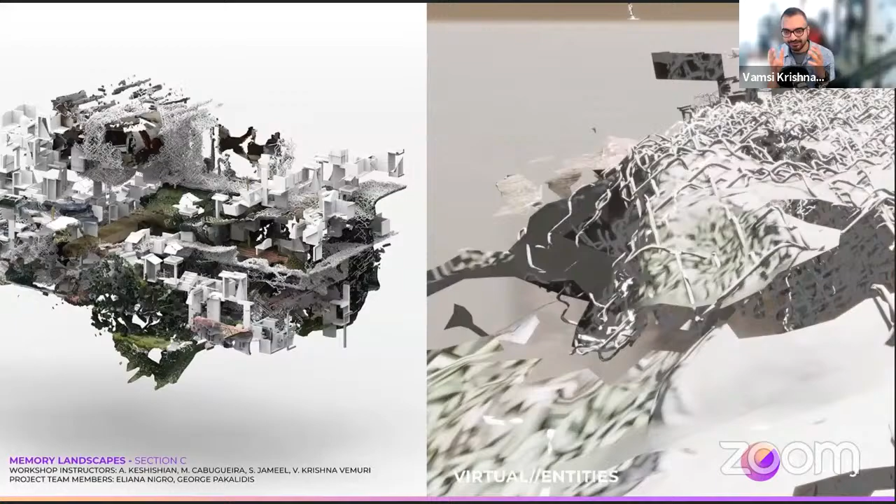So with that being said, this is my final project that I'll be showing you today. We explored photogrammetry strategies of documenting a small town in Greece using drones. The captured data, because of the machinic imperfections, is fragmented and comprises discrete chunks of the actual space. These discrete chunks have been rearranged and stacked in the virtual medium, and it attempts to showcase the historic essence of the actual town in a more digitized manner. And you see a new version of this city that emerges from this whole exercise.

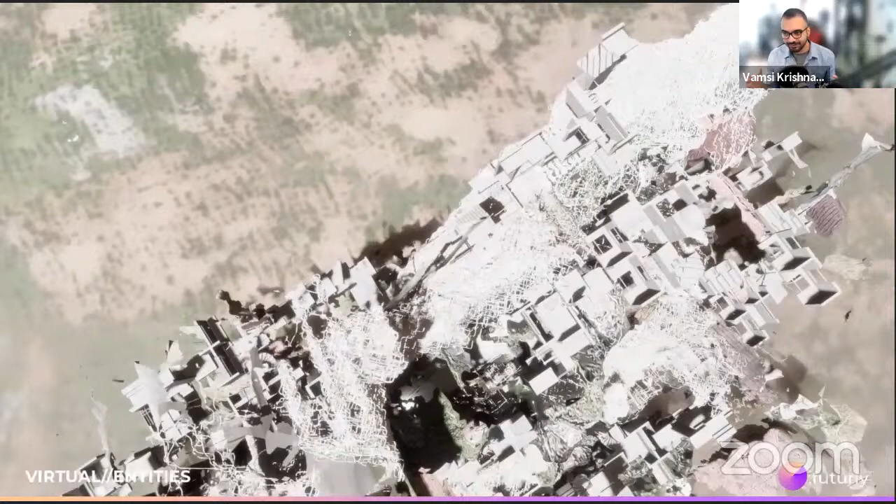So to summarize, what we saw is a glimpse of our ongoing research and exploration in virtual and hybrid architectural and urban scapes. What's really interesting is that we are now presented with a medium that aids us with the process of creation, and it also expands in scale and becomes a space of inhabitation. So we now have the opportunity to design using spatial media and also to design for spatial media. These new spaces are constantly changing, evolving, as opposed to the long-lasting nature of architecture as we know it.

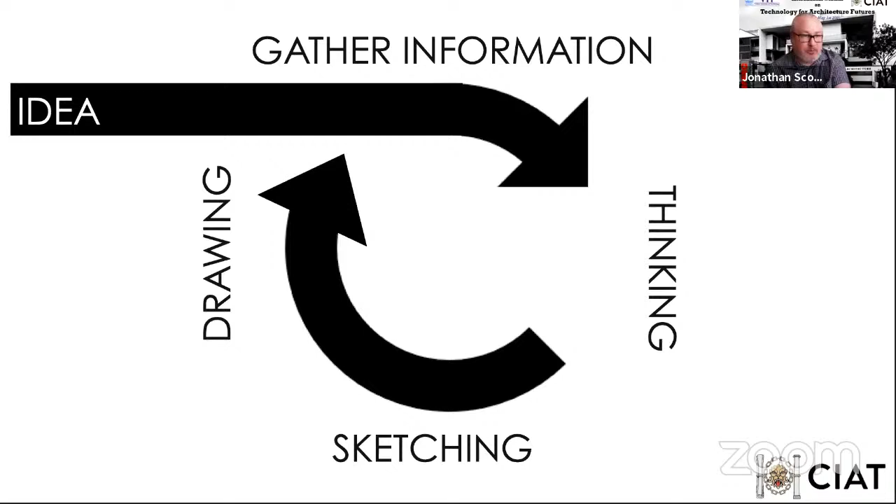It's a problem-solving exercise, so it's normally a cyclical process where you have a project or an idea that you gather that information for. You critically think about that information, sketch, draw it up, and fundamentally you get it wrong about 50 times before you get it right, if you ever get it right, or the closest fit to whatever the client's needs are, or the project brief in the academic sense. And that's reflected in our course. This is actually my course in a very neat

diagram. It's a journey with some core modules and some ancillary modules that fit in, and it adheres to a number of different criteria in Scotland, but the fundamentals of it are the technology modules in our second, third and fourth years that bring in the foundations of quite a lot of what has been talked about today. I will bring those into stage 3 and stage 4 predominantly. But I just wanted to introduce this to illustrate that it's a journey for the students, and for a Centre of Excellence, it's very much a journey from undergraduate to postgraduate as well.

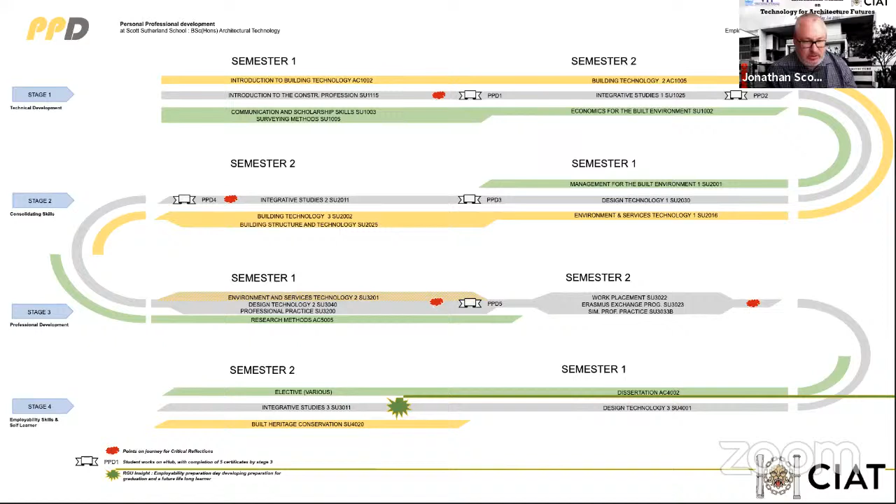We have postgraduate courses that our students go on to, one of which is Advanced Architectural Design, which talks about quite a lot of the stuff that Vamsi was talking about. So it feeds from the one to the other. That was very quick. I said it would be quick, hence the slide. But I'm happy to discuss the course or myself or my ideas on architectural technology in more detail. If you need it, you can just give me an email.

But getting to the point of this session here, I teach the three technologies. I think we've got a lot of students and a lot of ideas and a lot of perceptions about architectural technology in the UK. And I think from academics' point of view, the traction arguably is the architecture in the title, but not necessarily the technology. I certainly sell the course on the technologies. And there's three broad technologies I sell the course on, which I think are relevant to future cities, or ever more relevant to future cities, to be brutally honest.

And these are building technology, sustainable technology, and information technology. Building technology is our bread and butter. It's how things go together. We focus on buildings and we understand the buildability and construction, and that's changing. That's modernizing for future cities exponentially so. Sustainable technology: the zero carbon agenda nowadays, changes in approaches, and I think this will probably be emphasized by professional accreditation by CIAT in the very near future as well.

And certainly it's what my PhD was about. It's what I'm interested in. It's what my research predominantly is on. I've been involved in the Zero Heat House up in Scotland, and a whole plethora of assessment tools and sensors have been utilised in a number of buildings that I've been involved with.

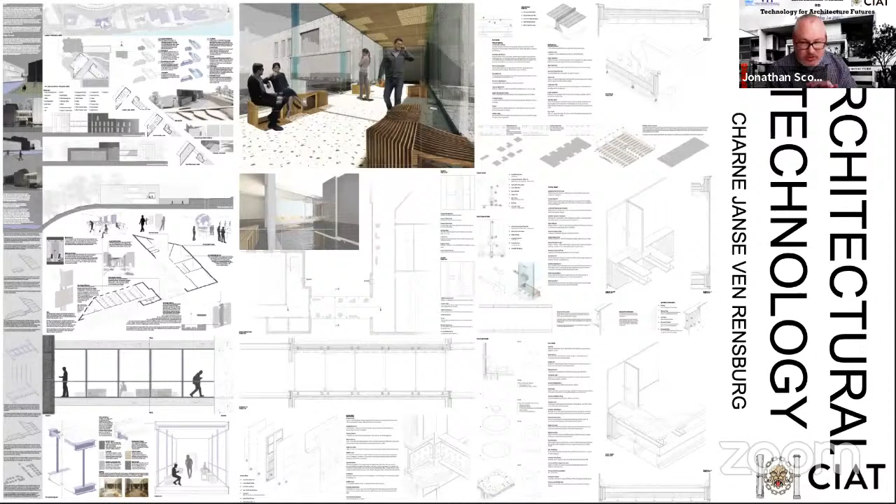But still kind of fundamentally adhering to the tenets of building technology being the core of an AT. And yeah, I kind of stuck to that 10-15 minute remit. So hopefully you're happy with that and that introduction. Happy to answer any questions in the next session if there's not another presenter.

Sure. Thank you so much, Dr. Jonathan. It was wonderful listening to you with all the different technology streams that you mentioned. You had also mentioned decentralized work patterns, which certainly seems to be our future, working not just decentralized, but also remote. It was really good to see your students' work as well, incorporating technology ideas within design.

Thank you so much. The last speaker for the session and of our 3-day event is Ms. Kavita Mohanraj. Kavita is a design entrepreneur specialized in the field of computational design, 3D modeling, and advanced manufacturing, with over 12 years of experience in design and product development and 8 years in the field of 3D printing, and driven to empower the use of technology in creative industries.

Kavita loves to explore the intersection of design, technology, and manufacturing, creating an innovative interdisciplinary platform that embraces values of the digital age and its diversities. Kavita is an ambassador at Women in 3D Printing, a global network which promotes, supports, and inspires women into additive manufacturing. I welcome Ms. Kavita to share her thoughts.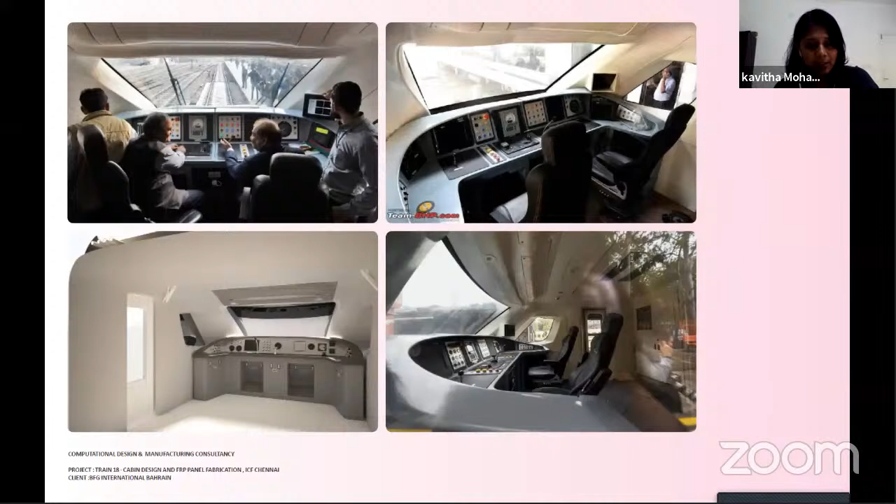And the entire process was quite complex. We were one of the few architects in an entire room setup where there were electrical engineers, instrumentation and control, lighting consultants, mechanical engineers. So there was a lot of data coming in for us to design this particular space. So all we had to do was collect the data, analyze the data, and refine it first of all, so we could design that particular space.

And apart from that, another very important thing was how do you design for composite manufacturing, which is again a very key parameter here for us. So slowly, once we got the initial set of parameters, we started developing. And another key thing is it has to be a generative design. The reason why it has to be generative is, let's say once we are done, there might be a lighting control person who will come in and say, in this particular space, you need to change something. So we had to keep all the parameters set right.

So we took the help of Rhino and Grasshopper, these softwares, to make it a generative model where the parameters could be easily malleable. So the first step was to give them options. This is with the government as well, so we have to give them a lot of options. So give them a key initial idea, but that idea is not enough.

In this particular project that I'm going to explain, and why I chose to explain it, is that in I would say 80% of our projects, we don't deliver a 2D drawing. It is all about the 3D model, because these 3D models are directly sent into machines to start building the final construction. So our interventions are mostly with computers and not with a contractor who is going to do a hand weld or so on.

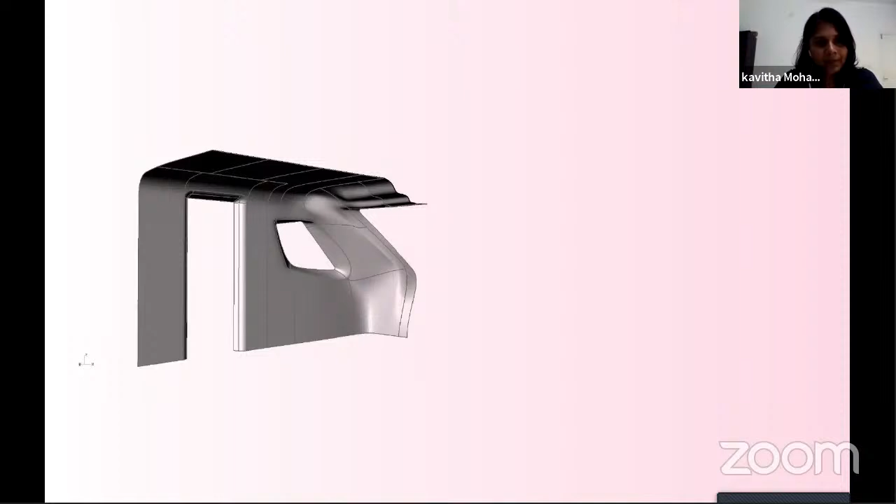So this is another, just a half part of the interior of the train. Again, this is completely with FRP, right? So this is again a little bit more of the interior shots of how we conceive the idea. This is actually Train 18, Vande Bharat. So the first thing that I showed you was the interior of the train. This is the train, and the inside is what we were working with.

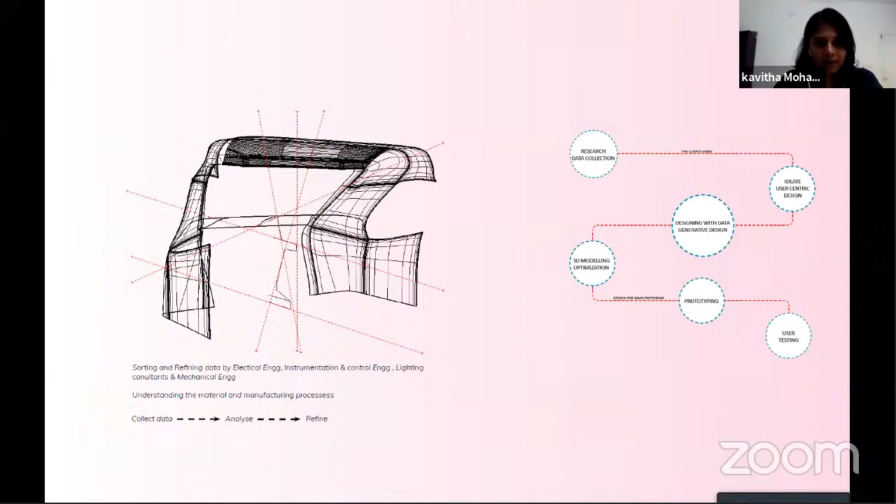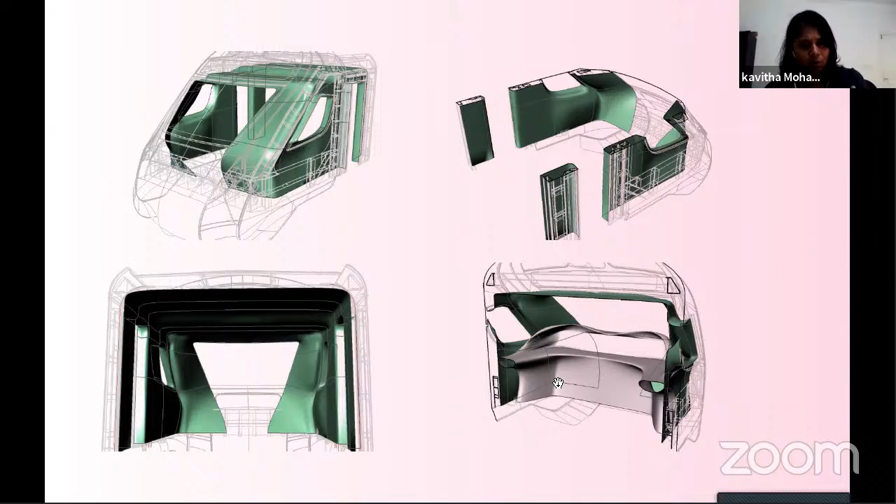The engineers, or I would say the officers, wanted a very liquefied organic design. So we created an organic design, but then finally there were also other limitations, such as the instruments that were used on the dashboard. So you would notice that though materially, construction-wise, it is possible to create a very organic design, something like what is here, there were limitations in terms of the machines that they used. The machines were still a little old. So these kinds of on-site limitations are also there, right?

So this is our way of creating. And again, just to point out, in this particular project there was no intervention of any 2D drawing, only a 3D model, which was done in terms of panels and sent to the manufacturing industry to develop it. So this is one, and we've been quite consistently working with ICF, which is in Chennai. We help develop the design, and we also sit in with the engineers to develop the design further as well.

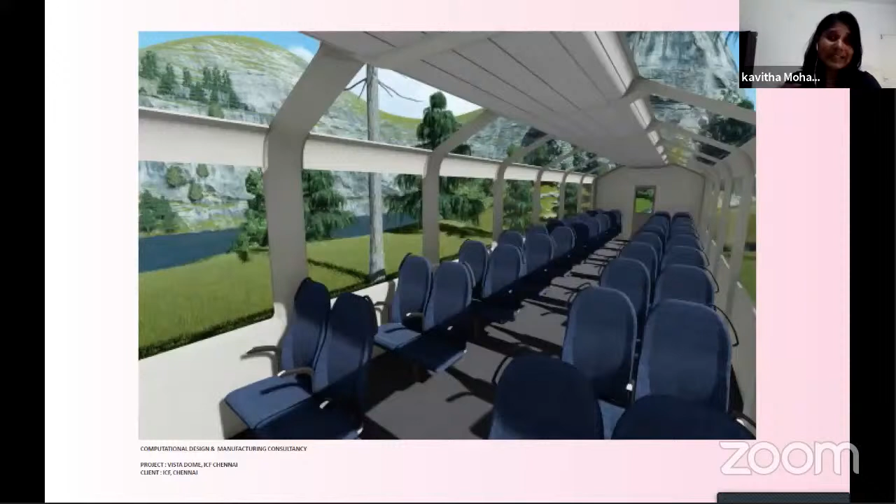So this is another train. So the last one, this one, I think is probably the first time I'm showing this outside. This is Train 19, and I think it's almost on the platforms now, which is Vista Dome. It's another train. It runs in the Araku Valley. So most of our work is about designing the interior of the shell, and the exterior is done by the in-house team of the factory.

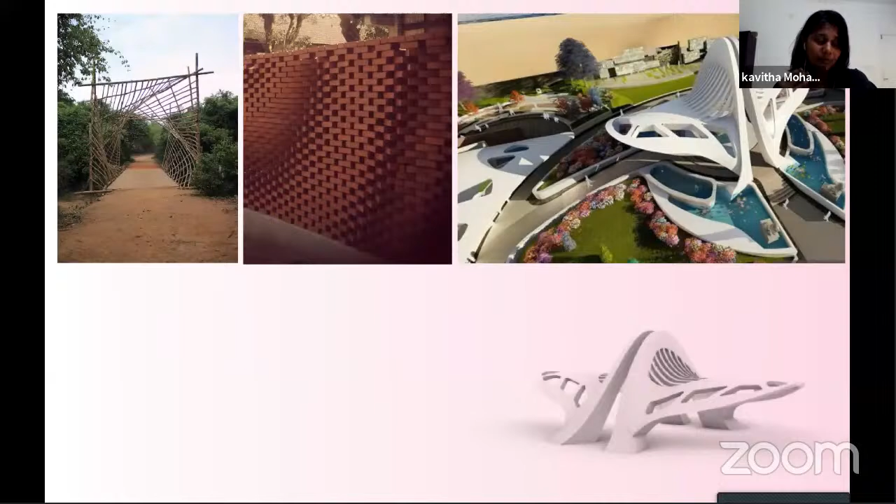And of course, we do quite a bit of facilitation for architects and designers. We help them build complex geometry, not to just give them an ideation, but to develop the model for manufacturing. So we work with quite a few architects to help them do that as well.

So instead, we developed a Grasshopper script with which they could insert just the CT scan file, and it will give them the final model, which has to be 3D printed. So again here, no introduction of any 2D paper print or anything is required. It's file to factory. That is what is done here as well.

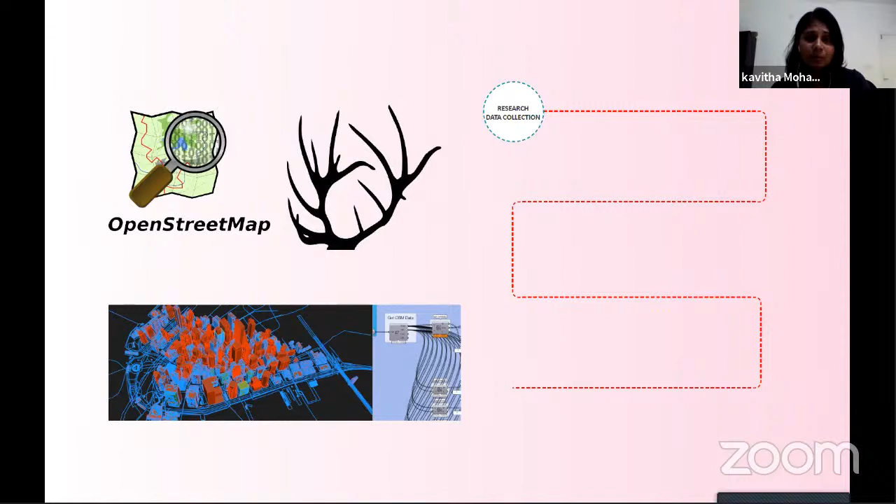We were talking about the city today, so I thought I'd introduce things like OpenStreetMap. I've personally seen a lot of people sitting and plotting for an urban design project or a part of the city, tracing it from Google Maps. That is not necessary, particularly when you combine it with a plugin called Elk. You can extract information into a 3D model directly from OpenStreetMap. So these are simple tools that you can start using.

This is another plugin called Mosquito, which you could use to extract information, and which we use quite a bit for our clients as well. If they want a certain set of data, we try and extract that data. For example, if there are 100 people at a beach and they've checked in via Facebook, you'll be able to retrieve their gender, their age, their name, and so on, the basic general information that is available to the public.

So for data collection, using these plugins will help you sort and refine a set of data, particularly when you work with a humongous amount of it. Again, when it comes to ideation, most of our projects have been in the public domain, so we try and use user-centric design because of the universal and age group categories as well.

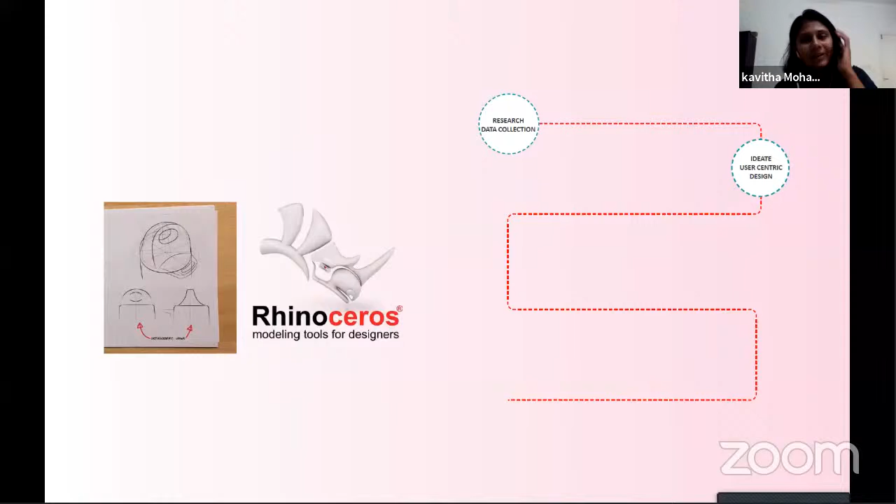So UCD is something that we work together with. And when the geometry gets complex, we tend to use the software. We embrace Rhino quite a bit because it's a file-to-factory software where you develop the design and you can directly send the design file to the factory, right? So we embrace that software quite a bit.

So the last one in this particular thing is prototyping, which will help you refine your thoughts and make it understandable to your end user. Say for example, if you're not prototyping, we could go in for VR or AR where you can let the client understand. Since we work with a lot of engineers, instead of making a paper print of a render, we prefer to show them via Lens, via virtual reality, this is how the train is going to look, which makes our life very efficient and theirs as well. So adapting those in this stage is a very good trick.

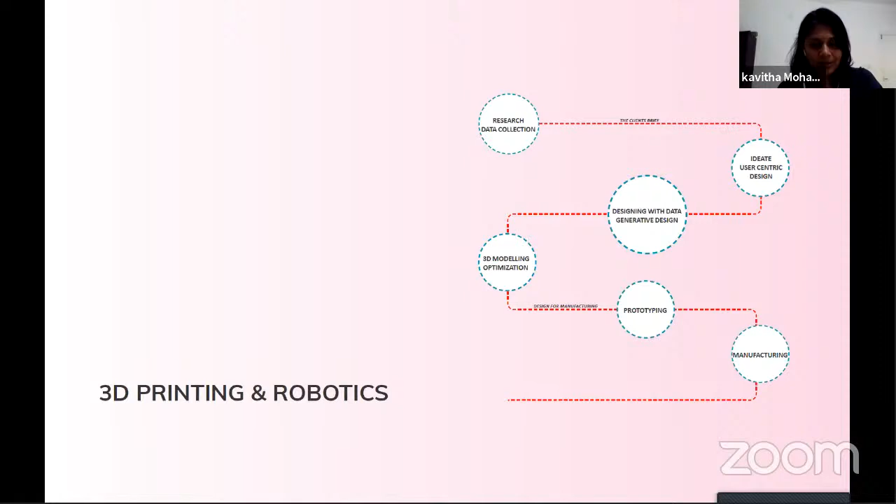Manufacturing-wise, there is a lot that we can speak about. I can speak about 3D printing for another hour, but considering the time, all I want to wrap up with is how robotics is going to change the construction industry. I think three days back, a group at IIT has already built a 3D printed house. Most of you would have had a look. If not, you can just type IIT Madras 3D printed house. You will notice that there are quite a few developments in India as well.

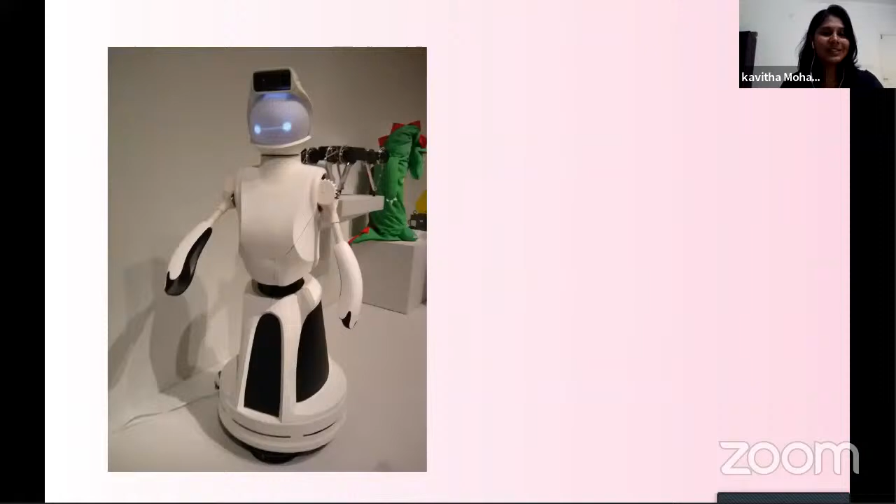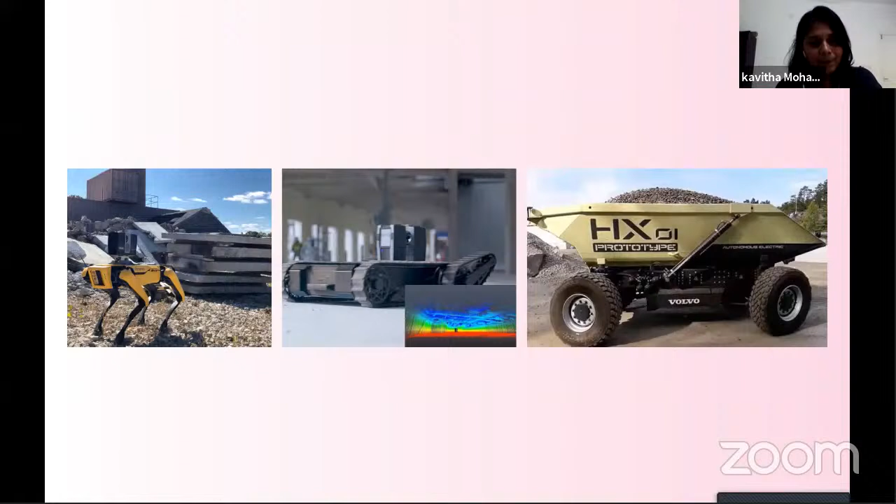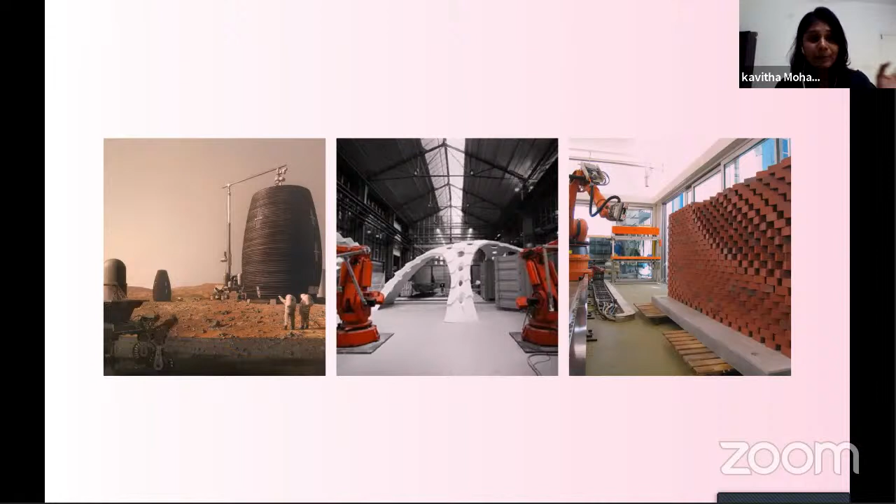The reason I got into it is mainly to tell you one point: it is very important for us to understand what is the brain, what is the file that you need to give these machines. You need to understand the machines really well and develop the design to prepare these kinds of models. So I would like to end the presentation with two thoughts: automation and digitization are the future of the construction industry. And the way we think, the way we realize, and the way we produce will definitely be impacted when automation and digitization revolutionize it.